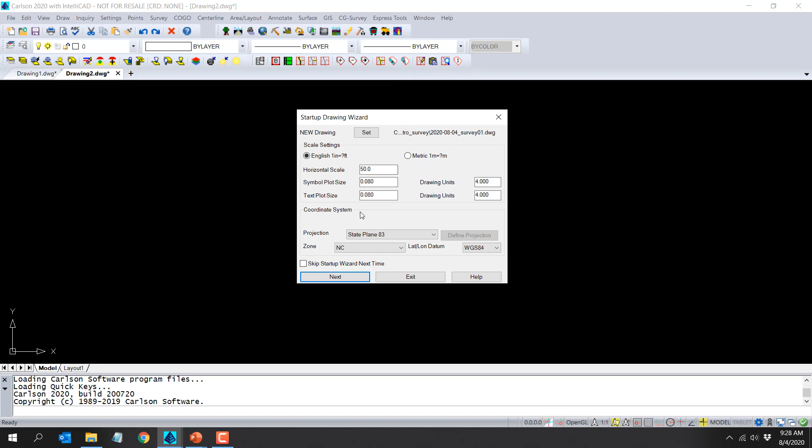So right when starting the drawing, I'm going to set the projection and zone so that everything is geo-referenced. You can see here on this wizard, the first screen, I can set a horizontal scale and some annotation.

I'll pick next, and here I'm going to tell it that I want to import a text file into a brand new CRD file. Because I'm using the drawing folder method, it knows that the data path, or the folder it's going to save in, is wherever my drawing is. And then it's got my CRD file name.

So the wizard just puts me right into my next step, which is importing my text file. It's looking in the same folder where my drawing is, and I had a text file. I can select it, and then I get data preview here. So it shows me the first 100 lines. Hopefully I can tell if I'm in the right file or not.

Back here, I can specify the format, comma delimited, space delimited, what have you. Another preview, and then when I draw points, I'm going to choose to use the Draw Locate Points command, which is one of the commands that's in the Points menu, so everybody has it. We'll pick OK.

And then the Draw Locate Points dialog box, it is pretty generic. It lets me set one symbol, one layer, kind of the same settings for everything is how I'm going to use it. So I'm going to use this command and draw all the points into the drawing. And so here they are.

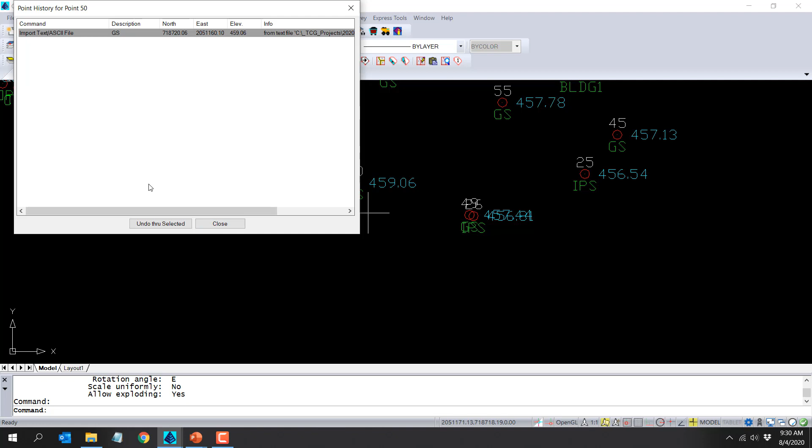I also have options to undo some or multiple commands. I can change the symbol or see it if I have any GIS data associated with it or an image. So if this is a field located shot and a picture was snapped, I can attach that or see it.

Some of the basic point management commands, if I want to list points, I can do so here. This is Carlson's kind of a text editor, it's like a notepad. So you can see all of the points. You can save it, you can print it to the screen, whatever.

Or if I actually need to edit points, I can pull up this dialog box, and you're actually working in the CRD file. You can double click, you can edit anything. There's also a find and replace function. I'm just going to close without making any changes.

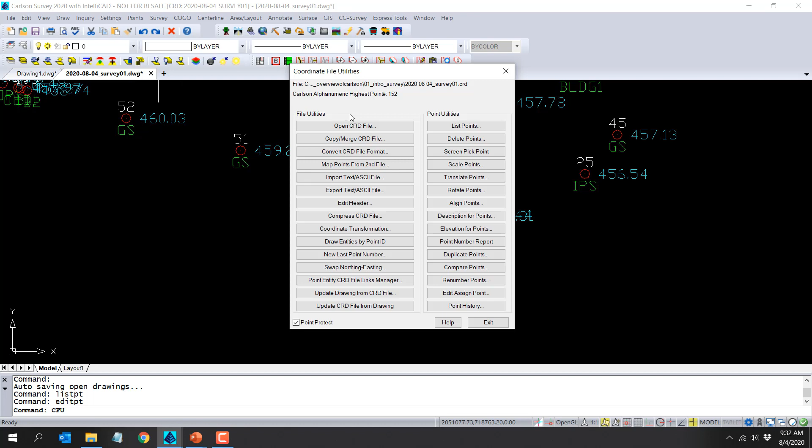So again, under the points menu, you can pretty much do anything you want. There's a ton of utilities and different things that let you edit the file or edit the points on the screen. Coordinate file utilities is kind of a good little catalog to go in here if you're not sure where to find something. So the left-hand column deals mostly with the file, the CRD file edits, and then the right side is more for on-screen.

So I want to show you one other property of points, and one of the best ways to do that is to use this command called shrink wrap entities. This is a command whose primary reason for being is to help you create a boundary around points or lines for a surface.

So when I go in here, it's going to create a 2D polyline on that layer around whatever I select. And so you can see I'm not being very specific, I've just put a window around everything. And you can see that shrink wrap polyline catches everything.

So this is with no preparation work. It's not looking at any points to figure out what's good for a surface or anything. This is the shrink wrap that we get. I'm going to erase everything, and then use Carlson's Field to Finish feature to redraw everything back in.

Field to Finish is specific to survey, but it's also in construction. It's in takeoff.

When we drew points with draw locate, it treated every point, regardless of its description, exactly the same. Same symbol, same layer, same everything.

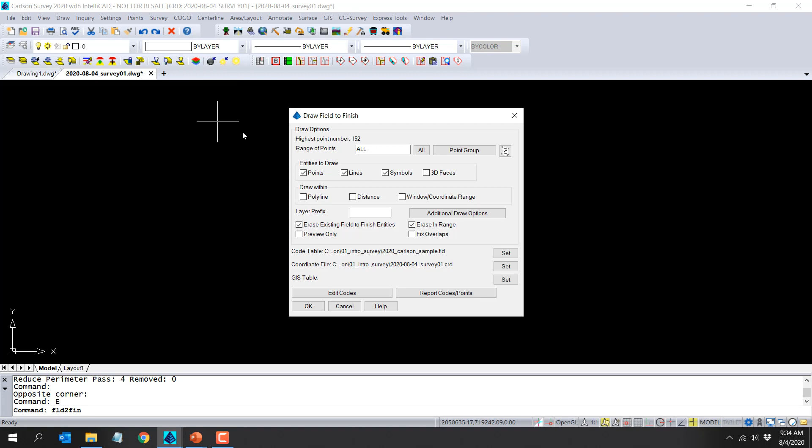All right, so let's just make sure I've got the right file set. I didn't think so. Let's see, existing. So this is my FL. Oh, nope, there we go. All right, so this is my FLD file.

I'm just going to draw everything to begin with here so that you can see what we've ended up with. So when I zoom in, you can see that the points, most of them look different. You can see I've got symbols here for my trees. I have line work that's been drawn. At the corners, I have different symbols again.

Let's just look at this in 3D. And you can see that I have line work and points that are elevated. So again, this is kind of a step that I want to take before I build a surface. I want to look at everything in 3D to make sure my elevations are good.

Now, what this 3D viewer allows me to do is ignore zero elevations, so that's how it was set. Now I've unchecked ignore zero elevations. When I zoom out, I can see everything with zero elevations down here, and then everything that's elevated up here. When I build my surface, I'm going to be able to just put a check mark and ignore all the zero elevations. So my main thing I want to look at here is that I don't have any really skewed elevations, and I don't.

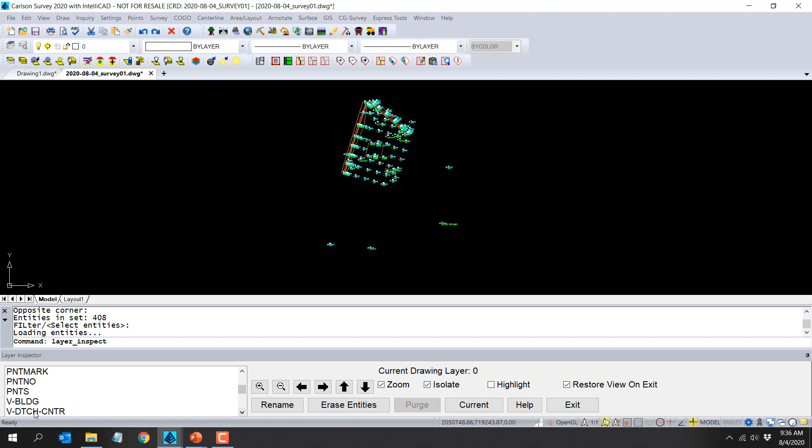I can also look at this with the layer inspector, and let's see what field to finish has drawn for me here. I'll scroll down a little bit. So layer inspector is isolating and zooming to whichever layer or layers I have selected in this list.

And then here on this layer, these are all my 3D polylines. So these are break lines for my surface that I'm getting ready to create.

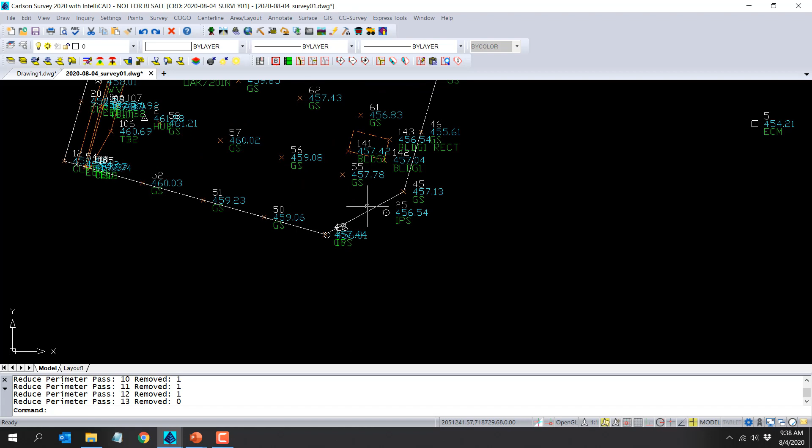And then finally, let's look at that last piece of the puzzle that I mentioned earlier. Let's draw shrink wrap, and I want you to see the difference in how the shrink wrap polyline looks now after drawing everything with field to finish versus before. So here's my 3D polyline, my 2D polyline, which is my shrink wrap.

Notice that this time, for some reason, it's ignored all of this. And right here is the best example and place to demonstrate what's happened. So if I pull these out, you can see the shrink wrap actually has included my ground shot, but it's skirted just around my iron pin. It's avoided my iron pin here.

So these are property corners that I know typically anything with that description is going to be a property corner, and the elevation is not going to be good for my surface model. I don't want it included when I build a surface.

Same thing here. So one thing that's built into the shrink wrap polyline command, it ignores anything that's considered a non-surface point. Okay, great. So why are these non-surface all of a sudden? Well, I did that with field to finish, but if I double click on this point, you can see here it's been tagged as non-surface, and I did that through field to finish.

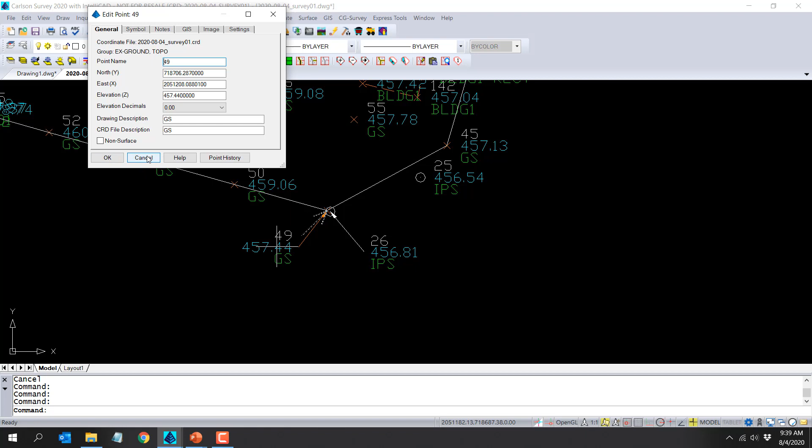So a ground shot is not tagged as non-surface, so it will be used for my surface. This out here is a non-surface. There are going to be other things, like interior points such as this hub, that are non-surface.

Under the surface menu, triangulation, setup, utilities, non-surface points and entities, report non-surface points - I can see a list here of all the points being ignored by the surface or by the shrink wrap. When I build a surface, these will all be ignored. Let's go into field to finish.

I'm going to edit those codes so you can see how that comes into play. ECM, right here, I've got that check mark. Anything with an ECM description is going to be tagged as non-surface. It'll be ignored by my shrink wrap and by my surface model or anything else that uses it.

While we're here, let's look at our center line of ditch. Here's a good example. Center line of ditch shots are always drawn with points, but in addition, 2D and 3D polylines. This is the layer for the 2D polyline, this is the layer for the point, and here are my 3D polylines, which will have just a generic symbol.

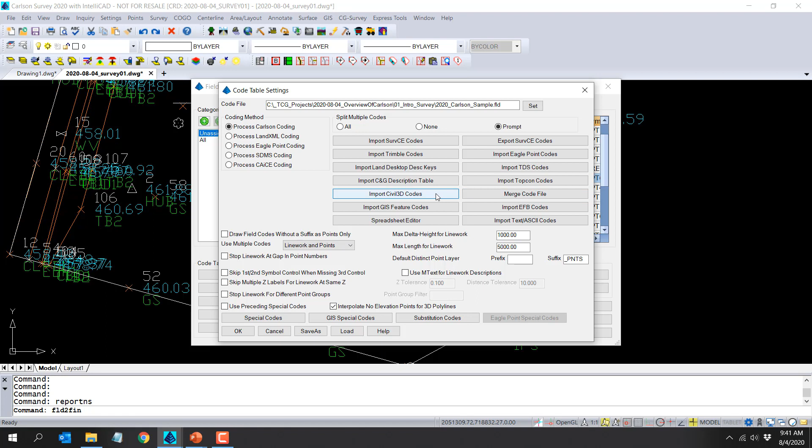Not there though - Civil 3D codes. I think description keys are in here. Land Desktop keys - there you go.

Okay, so this has all been drawn. I'm actually going to erase this shrink wrap. I always recommend before you build a surface, draw your shrink wrap, see what it looks like, and then you can erase it. Also look at everything in 3D, make sure your elevations are good, and they are.

When we're ready to build a surface, I'm going to go to Triangulate and Contour. And if you look right here, shrink wrap is actually built into this command. So the reason you do it ahead of time is to make sure that boundary is what you expect, and then you can erase it knowing that when you come in here, you'll get the same result.

Okay, so let's start at the top on the Triangulate tab. We're going to write a triangulation file. Yep, that's the right place. And we're going to just call this EG.

Let me put today's date on it, and we'll just call it EG. Right here, I have told it to ignore anything with a 0 elevation. So that means I'll be able to put a window around everything here, and it will only pick things with good elevations.

I'm going to uncheck these - we'll check them back later - but these are adjustments if you're building a surface from contours in the drawing, which we're not. We will draw new contours here, so 1 foot contours and 5 foot contours. We're going to label those, and then on my selection tab, I am going to choose all points and all polylines.

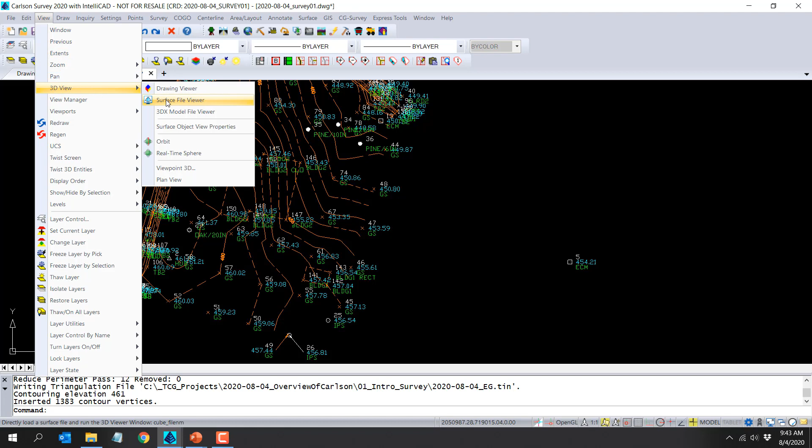Window around everything, hit my enter key, and when I zoom in, you can see that the surface has created contours. It's built the surface and drawn the contours for me. If we go to our 3D viewer window, now we can look at the surface file viewer, which lets me select the TIN file, and this is what the surface looks like.

Over here, I can turn on and off the shading, okay, but I can spin it around. I can see my work that I did ahead made sure there was no bad elevation, so my surface is good.

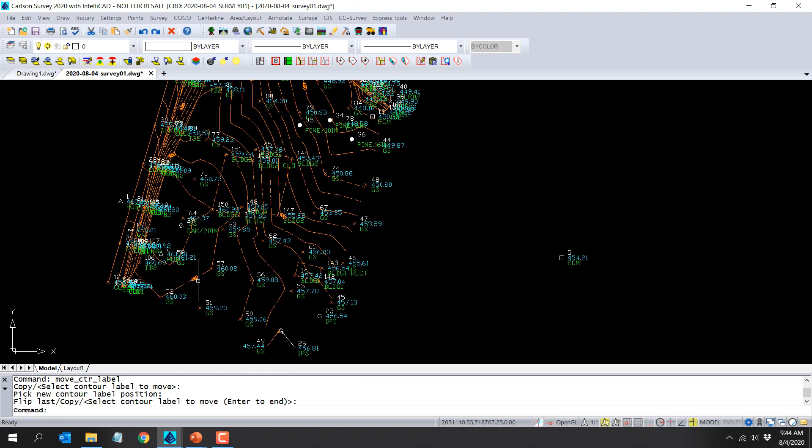And let me double check here - I think that's all I wanted to do in here with our surface. So now I want to bring in a background image. Okay, so I have some options.

If I just want to bring in an image and I'm okay with positioning, rotating, and scaling it myself, I can do that without a problem. It's in the Draw menu under Image. This is just the way you insert an image in plain CAD, in the first 7 menus that everybody has.

However, Carlson's GIS program has some really easy, handy tools to bring in geo-referenced images. We're currently in Carlson Survey, which has a GIS menu with limited functionality. You can bring in a few kinds of images, like MrSid images, or place an image by a world file. You can also do things like importing a shapefile.

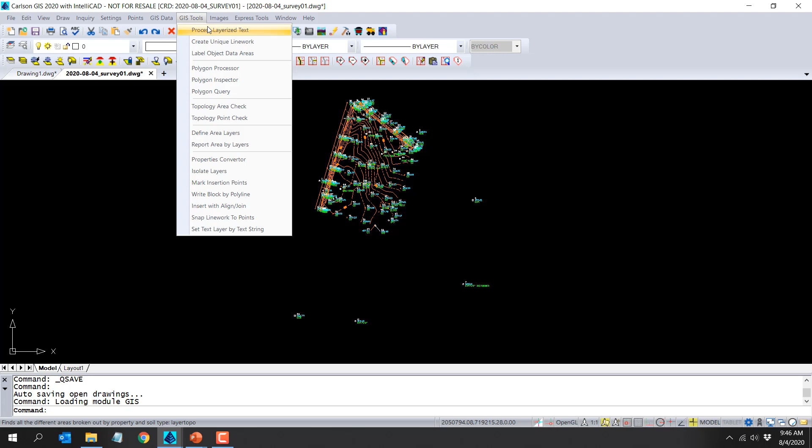What I'm talking about now would actually be another module, a different program called Carlson GIS. I've just loaded the GIS menu, and after the first 7 menus you can see GIS data menu, GIS tools, and the all-important Images menu, which is where all the cool stuff is kept. From Images, you can convert a MrSid or place by world file.

But we can also place a Google Earth image. I'll name this Google Earth, and screen pick my window. I barely made it, didn't I? And there we go, you can see the Google Earth image. Usually this is going to be the newest imagery you can get.

Another place where you can bring in other imagery is under GIS data, Esri ArcGIS services. This can be a little sporadic as far as what you get from linking up to the Esri servers, but if you want a quad map, you can do that, or bring in images of soils maps and things like that. We'll call this Esri, and this one takes a little bit longer.

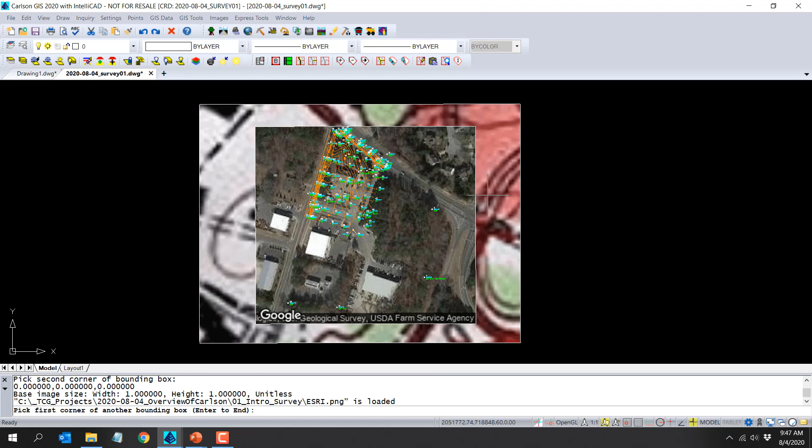And it'll come. There we go. Oh well, let's move this to the back. There we go, so this is like a quad map. Let me freeze those here for the moment.

Also, if you place a Web Map Service image, this is Carlson's version of the same thing for Esri that we just looked at, you're just using images on Carlson's server, and they've given you a lot of the same things. You can also use this to attach to your local municipality's database if they have available imagery. Similarly, Web Feature Service lets you attach to a municipality server to get all that data, if available.

Back in the file menu, let's look at exporting to Google Earth, which I mentioned earlier. If you're in a design role and want to send a subdivision layout or similar to your client, you can select anything in your drawing and export it out to Google Earth. All this requires is that you be in real-world coordinates, and, like we did at the very beginning, that we set the zone and projection for a project area.

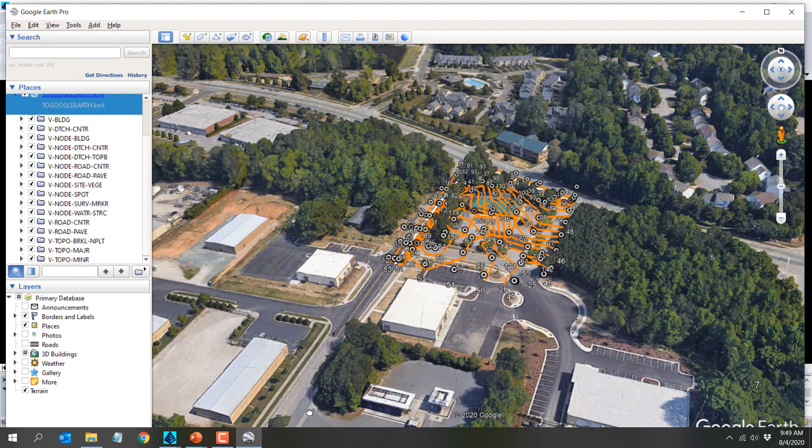You can see over here you've got all your layer information, and we can zoom in, but this is a good way to work. All this is a file, a KML or KMZ file. There it is, so you email that to your client. They double click on it, and if they have Google Earth installed, they're going to get this exact same view. So it's very handy as a design tool.

Okay, so let's move on. I think I'm actually going to close out of this, and I'm going to restart Carlson because I got a video display error. I've been having all kinds of technical problems lately, so I'm going to hedge my bets and just get out and get back in. Okay, so there's my menu. I'm going to switch back to survey and start a new drawing.

I just want to show you how to enter deed information or information from a plat. So I'll go into this folder and set a new file. We'll just call this deed.

Scale's fine, projection, this is going to be assumed coordinates, so I'm just going to hit exit here. So I'm just working in the drawing.

I want to create a very simple little example for you. I want to be sure that you understand that if you're going from a deed and you just have a bunch of boundary calls, or from a plat or whatever, there are many different commands throughout the program that let you do that. If all you want is a polyline in the end, whether you want to do it by northings and eastings, bearings, azimuths, turned angles, or deflection angles, however you want to do it, there are multiple ways.

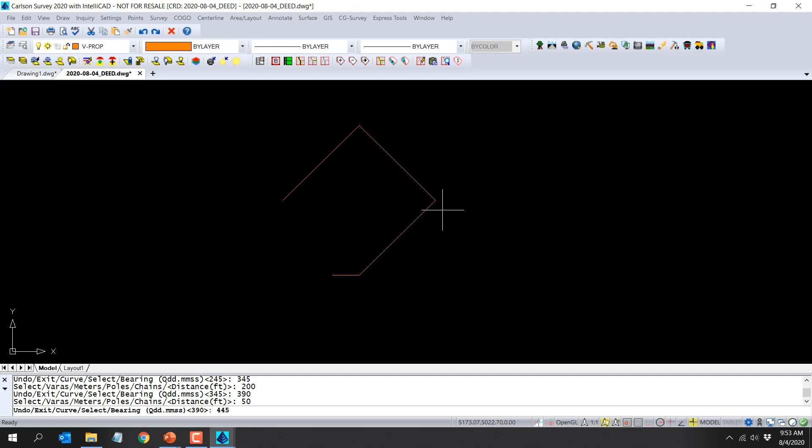And then this may mess you up. I'm going to go actually due west, so that'll be a southwest 90-degree bearing for 50 feet, and then northwest 45 degrees for 200. So kind of the example I'm using here is there should have been a flat spot up here, and we accidentally on purpose forgot it.

So the thing with doing this as a deed description is that it's much easier—if you've already hit enter and realize a mistake, just keep going. It's easier to go back at the very end and fix everything. It's much easier to do that than to try to undo or stop in the middle. So I'd encourage you just to go on.

I'm finished here, so I'm going to hit E for exit, and I have a beautiful, fantastic 1 in 17 closure.

But now I can go in here to process deed file, select my file, and now I can edit that. And this is what I like—again, picture having a list of 100 different calls. In the table up top, I can select one of the legs and it highlights it in the drawing view below. So as I go down, if I had a mistake in any of these lines, I would know which one to fix. In this case, I accidentally left one out.

So I can add it, give it the length, and then set my bearing and angle, and you can see that new line. Now it's here because it's at the bottom of this list. What I want to do is move it up until it gets into position. So it's moving up this list, and that's where I want it. Okay.

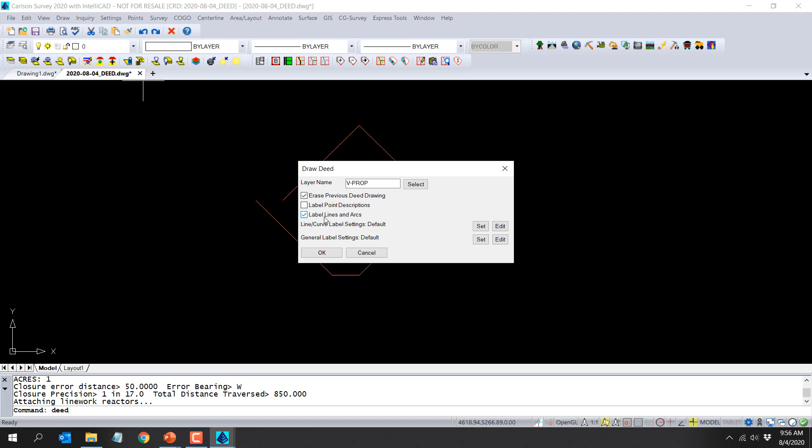I want to redraw this, so I've got the wrong one in the drawing, so I want to redraw. It's going to erase the previous one. Label lines and arcs—so from here, it's just going to put in kind of a generic labeling that we can see here in what's called the Annotate command.

So right now, Annotate has one labeling format for lines, and you can see it here—it's going to be angle above and distance below the line. For arcs, if I had any, it would just label it the same way for everything. So that's good as a generic starting place.

And then I can save and exit out of here and see what I've got. So I've got all this labeled.

Let's look at Annotate again. Under Annotate, it's the same command, but maybe I wanted angle and distance both above the line. So up here, angle, distance, I'm going to set distance above. And if I want them side by side, that's fine, or if I want my distance to be above. So I can set this however I want. And I've only got one polyline, but I could put a window around the whole subdivision if I want, and it would label everything.

Let me go back in there because this is also a good way to go ahead and specify line tables. Carlson gives you options for using line tables and curve tables. You can set it here to never, always, or by scalar. If you do it by scalar, you can set a distance here in plotted inches. So anything shorter than an inch would go to a table, anything longer than an inch would be labeled on screen. And you can see the same thing here.

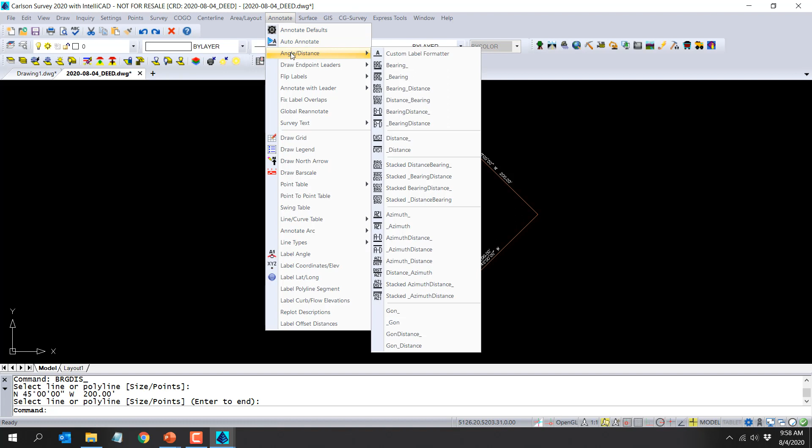All right, so Annotate's good to put labels on everything in one fell swoop, but maybe your outside boundary lines, like your outer boundary, you want to label differently. If you want to just do a few lines here and there that look different, you can do bearing and distance. Notice when we did Annotate and selected this, it did all the legs of the polyline the same. But if you just go in here and specify one angle and distance label format, it's just going to do the one segment that you select.

We've also got annotation here where you can move a label with a leader. So maybe it's just a little bit too short, but you don't want to put it on a curve table, or maybe it's the only one. You can do something like that. So with their annotation, Carlson gives all kinds of options. Again, there's so much more in here that I'm able to get to, but hopefully that gives you a taste of it.

Okay, close that. Let's open up and look at, oh, I was in the right place. So I want to show you Carlson's LotNet routine. This is Lot Network, a way to subdivide a large area using a certain set of criteria. Carlson's LotNet is available in Survey or Civil, and I think the other maybe Takeoff. You can work with LotNet in a couple of different ways. You always have to have the outer boundary, but as far as the roads that are internal, you can have the roads drawn in two different ways. You can see here I've got a center line, and then I've already done my offsets to create the right-of-way. So that's something I did ahead of time, and I can start from here.

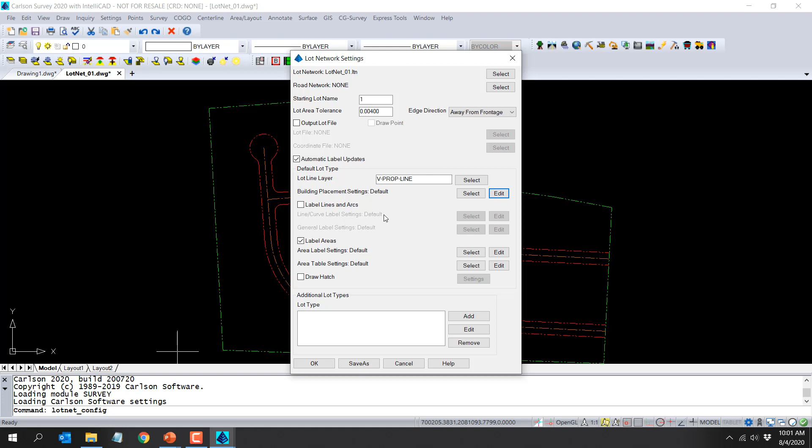Label lines and arcs, I'm going to have that turned off for now, but all it does is use auto annotate that we just saw. And then I'll have it label areas for me.

On the toolbar, the next thing is to set the boundary, so I'm going to select that closed outside boundary. If I had a road network, I could change it here, but I'm not going to use that. I'll add my right-of-way polyline, so if I'm not doing it as a road network, I have to be able to select on my right-of-way polylines. Okay, so now it has its enclosed areas to subdivide.

So I'll start over here, subdivide area, and I want to set this up. I'll pick inside lot area to subdivide, so I'll select here. My first thing here, it's kind of like I talked about with auto annotate. I want to put in my lot settings to do a whole bunch at one time, see how they work, try to get that consistency for as many as possible, and then there's going to be a few that don't work, and I'll go back and tweak those as I go.

As a starting point, I'm going to have it draw 15,000 foot lots. Minimum frontage is 100 feet to be measured at the setback. I can set my minimum, maximum depths. Remainder is going to apply equally to all lots, so everything should be a minimum of 15,000 feet. And then when I check that building placement, I can just recheck all my setbacks here.

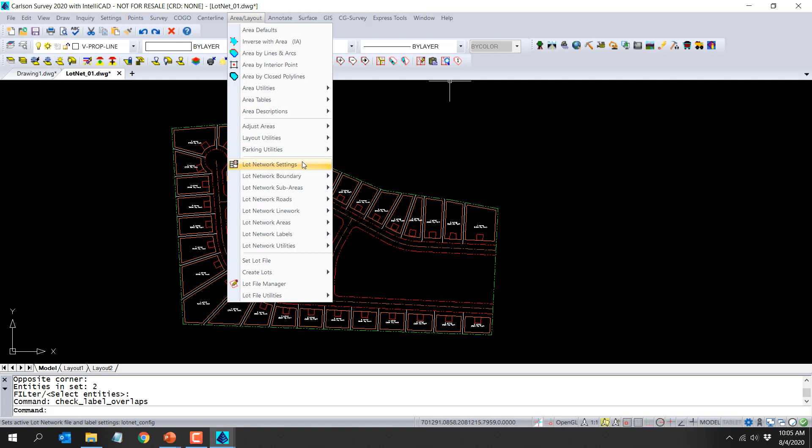So again, there's a whole lot more that you can do. You can report, you can number, renumber, put everything to a table, export it however you want. Let's take a quick look under area layout, and you can see under lot network all the different things that you can do. You can define sub-areas, so if you have areas of poor soils or open space that can't be included in your lots, you can tag those and separate them out and report them differently. So there's a ton of things that you can do. I just don't have time for on this, but that is Carlson's LotNet.

So next I want to show some grading tools. So this is what I call my little sandbox, a demonstration drawing to show you a bunch of different commands that are available in Carlson, because when you get to site grading, there's so many different things you do in so many different orders.

I have other webinars that go through these, like go through a whole site project grading. But I think for today, I just want you to see the tools, and then you can kind of be creative, and I think a lot of people will understand how those can be used.

So these are going to be tools in Carlson Civil. I'll pull that menu back up here, and switch to Carlson Civil. These commands are going to be under 3D data, mostly under 2D to 3D Polyline.

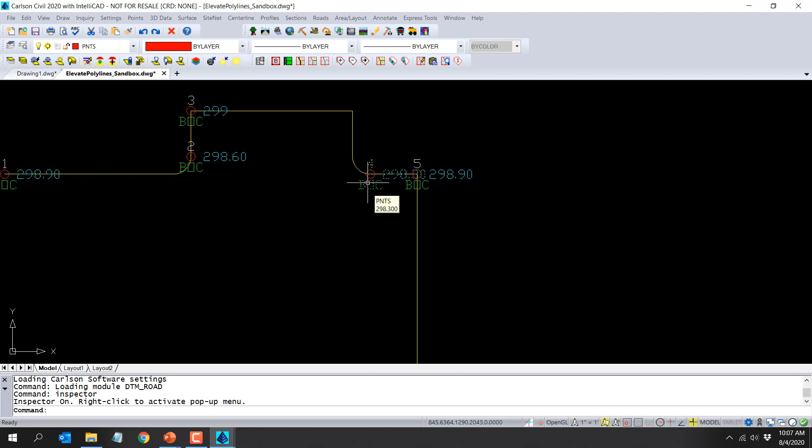So let's zoom in here and just look at this example. I'm going to turn on Drawing Inspector, and you can see that I have a 2D zero elevation polyline here on E road back of curb. These points are set on vertices of that polyline, and this is just a 2D polyline. It's just got an arc in here.

What I want to do is elevate and create a new polyline using these elevations. So I'll use 2D to 3D polyline by points, and ask for CRD file, that's fine.

I want to keep my existing polylines and put the new polyline on this layer. Watching the command line, select polylines to convert, enter, and then select the points. I'll just put a window around it, and you can see it's changed.

If I look at that polyline in 3D, you can see it here. I'll zoom out. So here's the 2D zero elevation polyline, and here's my 3D one that's been elevated now.

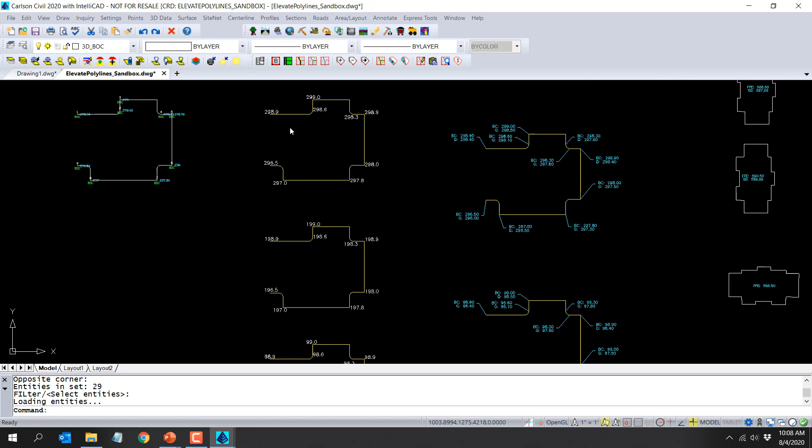I'll show you this. The primary purpose for this one is just to see that we have 3 different polylines with text. I don't like this method. The main reason is that it's hard to understand how close the text has to be to what part of the polyline for it to elevate. Is it going to be this vertex? Is it going to be the closest part? Who knows? So I wouldn't recommend this, but I am going to do it just so you can see.

I've got 3 different polylines. I've used one of the Carlson tools to change the elevations by 100 on each. Anything I'm showing you here can be done on an entire Target parking lot, if you're trying to elevate islands or something.

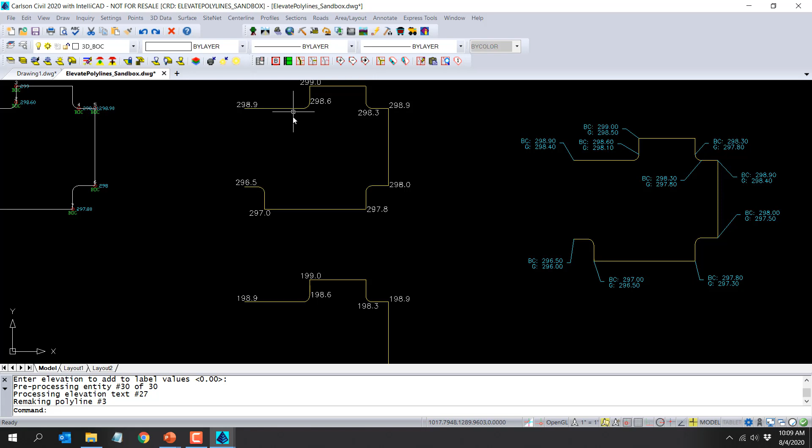So this is 2D to 3D polyline by text. Watching the command line, select a sample of the text, sample of the line or polyline to convert, and then I'm just going to window everything here. And it elevated the actual ones - it didn't create a copy for me, but you can see that did work.

So if you're going to do this, I recommend this option, by text with a leader. I like this one because just like with points, you know exactly what location on that polyline is getting elevated. The other advantage of doing points or this with a leader is there doesn't have to be a predefined vertex for it to know what it's elevating.

So I can just - there's not a vertex there, I just snap to it. And let's make this a foot higher even. Then the other intricate part of this is that we have two elevations pointing to the same location on the polyline, and how does the software know what to use?

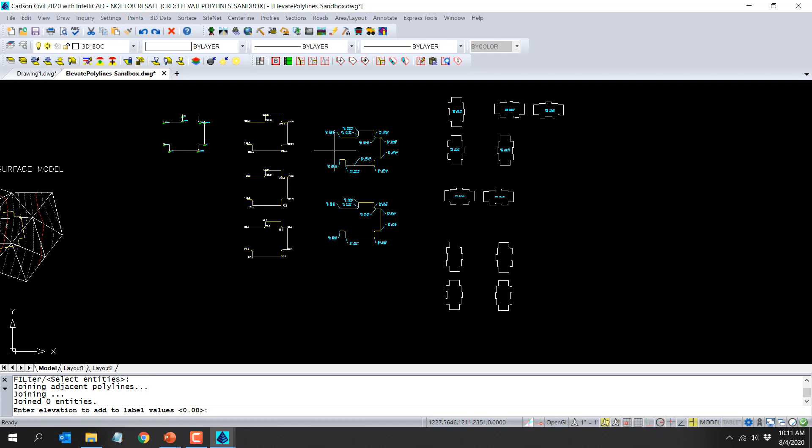So let me show you how that works by text with a leader. Select a sample of the elevation text, sample of the leader, sample of the polyline to convert. I'll put a window around both of these, and then it comes up and recognizes there were different prefixes and asks me which one to use.

I'm going to use the back of curb elevation, and so it has done so. If I click here, you can see it's inserted that vertex, high point. It's elevated all this for me. If I look at everything in 3D...

Oh, I had a 0 elevation. Oops. Oh, did it not do one? Oh, they're just different elevations, that's why. Okay, bad example, but you could see everything was elevated. I confused myself there for a second. So these two polylines have different elevations - this one's at the 90 level, and this one is up in the 200s.

Okay, so building pads. Let's say you have a whole subdivision. You've got 0 elevation building pads, and you have labels showing finished floor and subgrade.

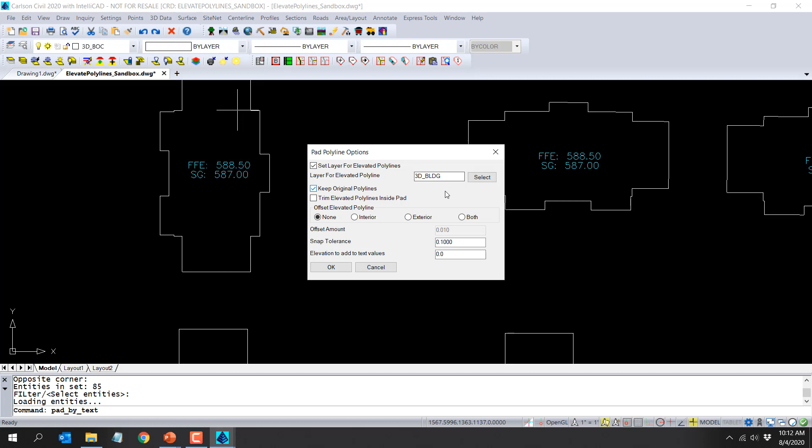Under 3D data, this one's here, pad polyline by interior text. I'm going to have it put the 3D polyline on its own layer. So it asks me to select a sample of the elevation text of the boundary line work. Select all.

Again, it found 2 pieces of text with different prefixes. And here it's created that 3D building for me.

And then in Civil, you also can go the other way, so you can see how I cheated here. These are elevated buildings, and under Annotate, label Polyline - is that it? Yeah, no, that's not it. Ah, I just got lost.

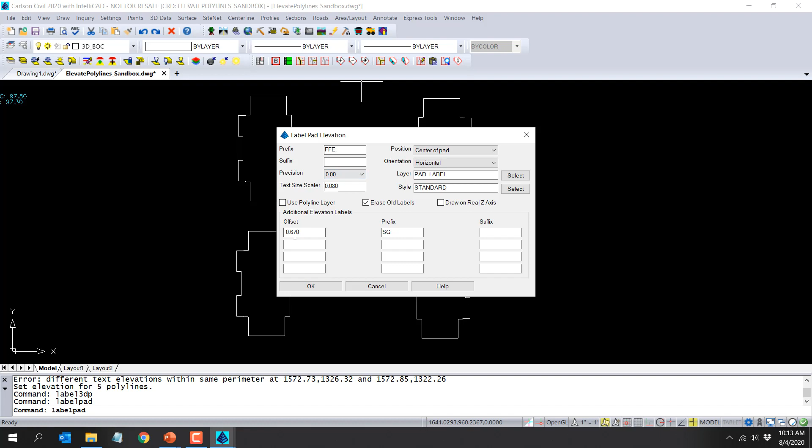Label polylines, there we go. Label pad elevations, so you can see it's still set up. I've got a FFE, and then subtracting 8 inches to label my subgrade, and I can do that.

Let's go up here. I want to focus now on this one. So here's another building pad with a 0 elevation, back of curb with a 0 elevation. I'm going to use a different command for no other purpose, just to show you something different. If you have just one polyline, you can also do this by selecting the text. So I'm going to select that text and then select the building pad, and it's just maybe a little different, but get the same result.

Now I want to elevate this curb, but you can see it's got 0 elevation. I want to show you one of the other tools in here to set points on this curb so that eventually we can do something like this. So 3D data, 3D points, points by slope.

I want to enter my slope as a percentage, and I'm going to screen pick my location. So my reference point, I'm just going to snap nearest to this elevated pad. You can see it reads the elevation. And then my new point is going to go here.

The slope is going to be -2%. And the description is going to be BC for back of curb. So you can see the elevation it used.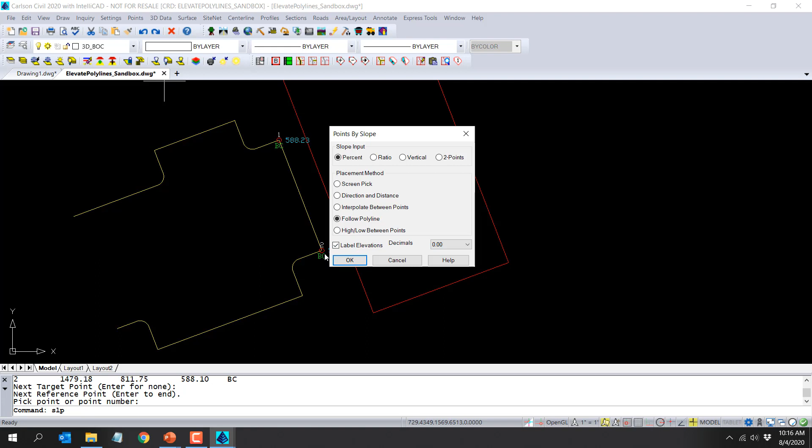Let's say I want to come from point 2 and I want to set a point here, I could do a screen pick and it's going to calculate the slope straight line distance from here to here. Or I've got an option to follow the polyline, so it'll calculate the slope along a longer length to give me a different elevation. My reference point in this case would be point 2, and my target point would be here. We'll go up at a +2, follow that polyline, and that's the elevation I get.

So I can use this as a tool for setting these points, and then go back 2D to 3D polyline by points and start elevating my 2D polylines to 3D for grading.

Okay, so I think I'm done with grading here. I want to move on next. I'm going to show you how to do just kind of generic center lines and profiles, just manually. Let's say you've got a single center line of a road or whatever. And then we're going to move into RoadNet, and I'll do a little bit of hydrology.

We started this off setting up our project and data folders using that drawing folder method. Again, drawing folder is a good option for you if the project you're working on doesn't have too many files. As soon as we start introducing center lines and profiles, or roads particularly, we're going to get a lot of files.

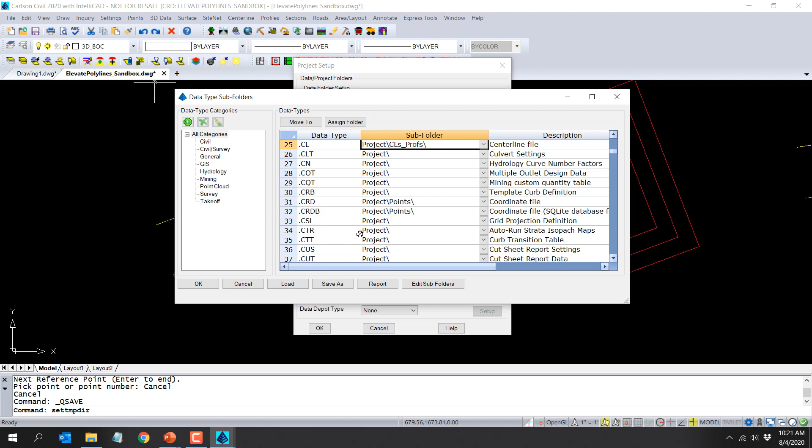So you can create this project folder and subfolder tree. The second step is to go to the data type subfolders. This lists every single file that Carlson creates, but you don't need to worry about all of them, just the files you know you have a place for. So CL files are for centerlines, and I want those saved here. CRD files here, drawing files here. Any other random file that gets created goes to the top level project folder, and you can double click and browse to where you want to save it.

So now that we're moving into centerlines and profiles, I'm switching to the project folder. I'll pick OK, save this, and then open my next file.

All right, so here you can see I've got contours. If I do a 3D view, I actually have a TIN file already, so I've got a surface underneath. I want to show you how to manually create centerline files and profile files.

This is in Survey or Civil. I'm purposely going to stay in Survey because I'm very much a fan of the fact that Carlson gives you the ability to do profiles from survey. It's just a small set of menus, commands here under the Surface menu. But everything I'm getting ready to show you, we're going to stay in Survey to do it.

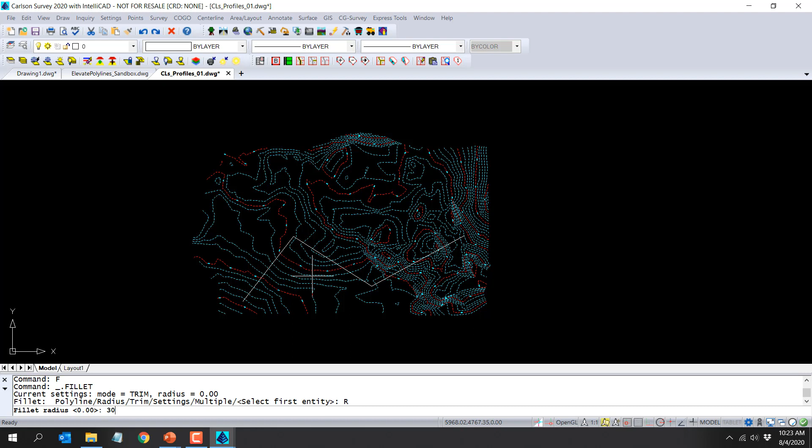I'm going to start off by sketching in a few tangent polylines. I'm going to fillet it with a 300-foot radius. And then I want to define this as a centerline file. We call it a centerline file because it's any horizontal alignment, so it can be used for anything, not just centerlines.

The command is under Centerline, Input Edit, Centerline File. This is like a lot of Carlson's... oh, I went to the wrong place, anyway. Scratch that, I'll explain that in a minute. I'm actually going to do Polyline to Centerline File, since I have the geometry in the drawing as a polyline.

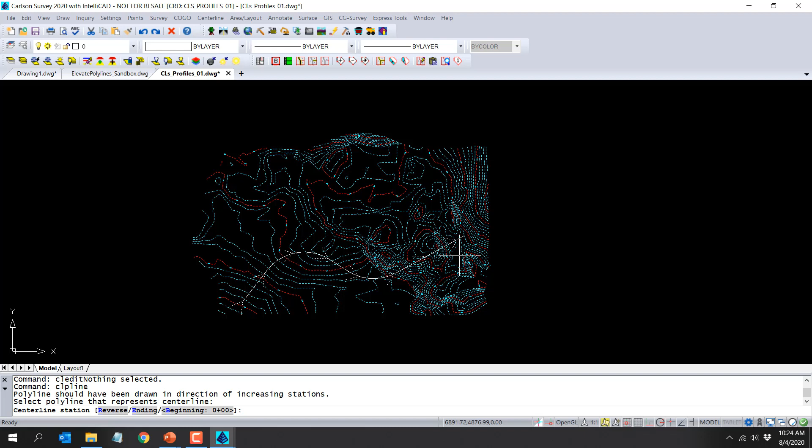So right here, I'm just going to give it a name, CL1. Then at the command line, it prompts me to select the polyline representing the centerline. It gives me little arrows showing the direction, so I have a chance here to reverse it if I want. I can also change the default starting station of 0, but I'm going to leave it for the moment.

So that CL file's been written, and I'm going to go to Centerline, let's just station it real quick. So you can see my stationing, I can set that up here, and change the formatting of the label, whatever.

Now I don't have to create a CL file in order to get stationing, but if I have created a CL file, I would mostly recommend that you do that, always use it, just to keep things consistent throughout. So there's the CL file, and here's my stationing.

Now let's talk about Input Edit. You're going to see this across a lot of other Carlson commands, this Input Edit this or that. This is Carlson's file dialog box. If you're going to create a new one, you can do that from here. So if you're trying to recreate a design that's already been done, you've got the paper plans, you just need to build the CL file, you can do that starting here with a new file. Or if you have an existing one you want to edit, you can do that too.

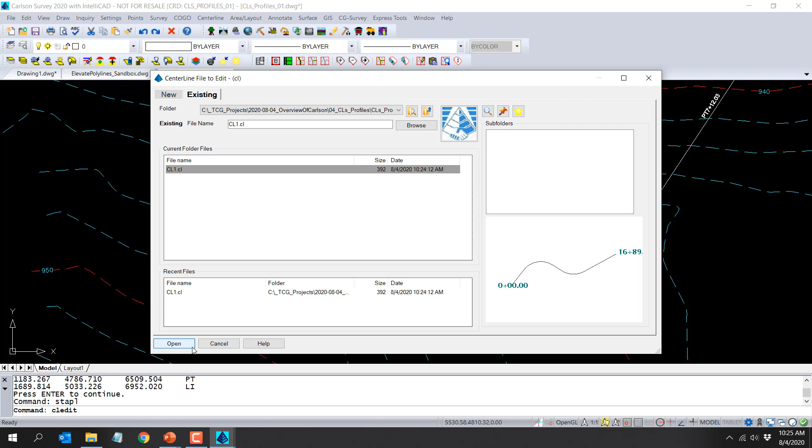So here, like in most things, you've got a graphic view and a table view. If I want to change any of those components, I can do so, or I can go here and make a change to the station, for instance. You can see my station has updated. I'm just going to save and exit, and you can see that my stationing has updated in the drawing. So, very simple, not much to it.

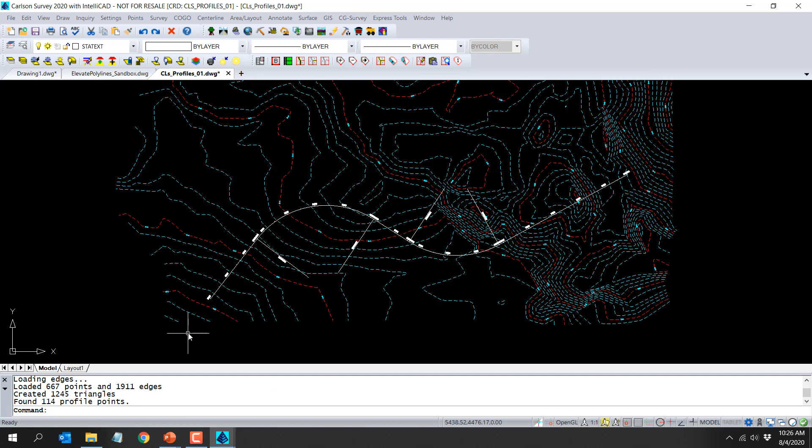But let's move on and look at how to manually create our profiles. In Survey, under the Surface menu, I can create a profile from a grid or triangulation surface, which is exactly what I have - this is the surface I want to sample. Pick OK, and then the profile to write - this is my Centerline 1, and it's going to be my existing ground. At the command line, it gives me an option of choosing that polyline in the drawing, but anytime I've created a CL file, I want to refer back to that.

So it has created the profile. If we go to Surface, we've got Input, Edit, Profile File. Just like we talked about a minute ago, I want to look at this profile, and here's my profile editor. Same thing, I've got the graphic view up top. As my mouse moves along, you can see the information is updated. I have a table view here of each of the PVIs.

But very important and very cool - it's one of my favorite commands in here because it's so simple, but it lets you do so much. Carlson has different profile types - there are 6 types of profile. This is a profile that was generated from my surface and an alignment, so really the only information it has is the station number along it, and then an elevation and slope.

If you have different profile types, you get different headings at the top. You always have the original station, elevation, slope, but for instance, when we switch and say this is a road profile, which doesn't fit, but you can see you get vertical curve and sight distance. When you have a sewer type, you can see you've got pipe size, rim elevation, manhole ID, and so on. We're going to come back to that, and that's going to be real important to us.

But for now, we're just going to save this as an existing ground profile, exactly as it was sampled. And I am going to add a proposed ground profile over top of that. So this will be going into the same place, just telling it I want a new profile called CL1PG.

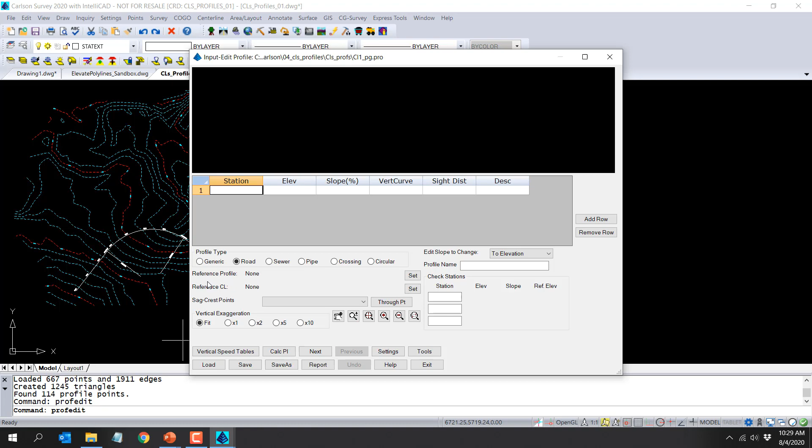But the reference profile is going to be my existing ground, so while I can see it and reference it, it's not active - I can't move my cursor or anything. But here I can see my beginning and ending stations. As I design this new proposed ground profile, I'd like to tie in at the start and at the end to existing ground. So this is my first station, I can type in 1,000 for my starting station, and it's going to tell me what the reference elevation is.

Well, this is cool how this works. If I know I want to start my proposed profile here, I'll set my station, and then I can type in that reference elevation. Notice when I type it in, it tells me over here what the depth is - so just keep that in mind. If I want to tie in at exactly my existing or reference elevation, I can just type a 0 here and set the depth to 0, and it reads that exactly.

So let's go to the end and just put those in first, 2689.8102. I can see it, so in a way I don't actually need to do this - I can just go up here and enter my station number. If I can do it correctly. And now I know I can just go right here and set the depth to 0, and I have kind of a generic proposed ground profile from start to finish.

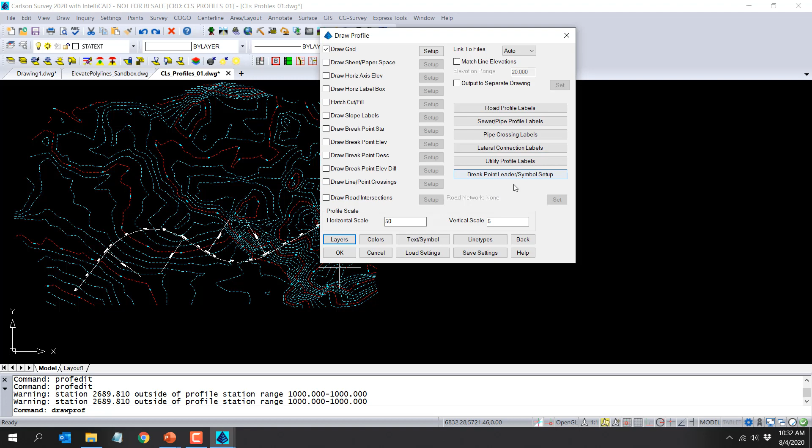But this is the important thing. Notice all these label buttons over here. These are based on the type of profile. So if we have a road profile, I can go in here and tell it how the labels for a road type profile should look. And I'm just going to accept what's there. You'll have to trust me that you can do pretty much anything you want.

Let's pick OK. So my elevation range, the lowest is 924.7. This is showing an elevation of 920 for my bottom grid. I'm going to change that to 910 to make sure I've got room to get some pipes in there. And we got it.

So here it's nothing fancy. I may need to change it, but you can get the gist of it.

So on top of this, I want to add like a storm run of pipe, and some crossing structures. So I'm going to use Input Edit Profile File again. This will be another new one, and this will be for storm.

My reference profile in this case, I'm going to reference my proposed ground. And again, you may have paper plans you've already got to recreate. I'm just going to kind of swag some stuff in here.

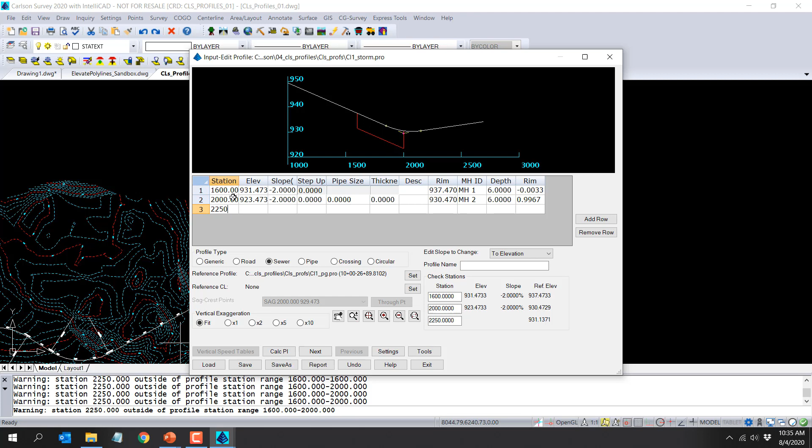And then I'll do my last one at 2250 - 931.14, manhole 3, 6, and there we go. So the only thing I need to add is the pipe size, so let's just call it 18-inch RCP for both.

Very simple. I'm going to save this and exit. And then before I draw it, I'm going to go back in.

I'm just going to repeat this one more time, and I want to show you that you can also add crossing pipes. So this is going to be a crossing type, and loading in, I will do my proposed ground surface, my road again. And I just want to do something that doesn't really conflict with anything, so I'm going to put this in at like 1275. Let's see what my elevation looks like, just to swag that in.

So this, I'm going to set this about 3 feet below. So let's do, I'll do it lower than that, 938.6. And pipe size, we'll just say it's a 6-inch water.

Save it, exit. All right, now let's draw it.

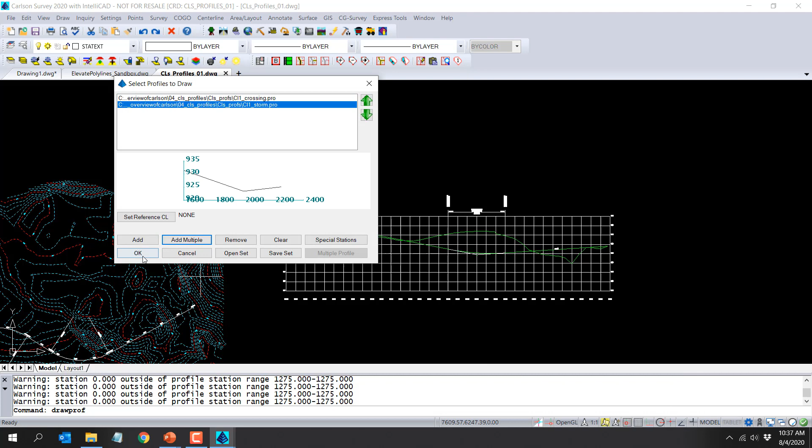So sewer pipes, this is what the labeling looks like. I don't really have much. Draw manhole name, do something like that. Pipe crossings are going to look like this. Oh shoot, let me cancel that.

So the other thing is I want to keep the grid that's in here. So I'm just going to uncheck where it says draw grid, and then you'll see what option that gives me. Now I've got an option to draw an existing grid, only because I unchecked grid in the previous screen, and I can pick anywhere here, and it just adds it. So I don't need to know the scale, I don't need to know anything.

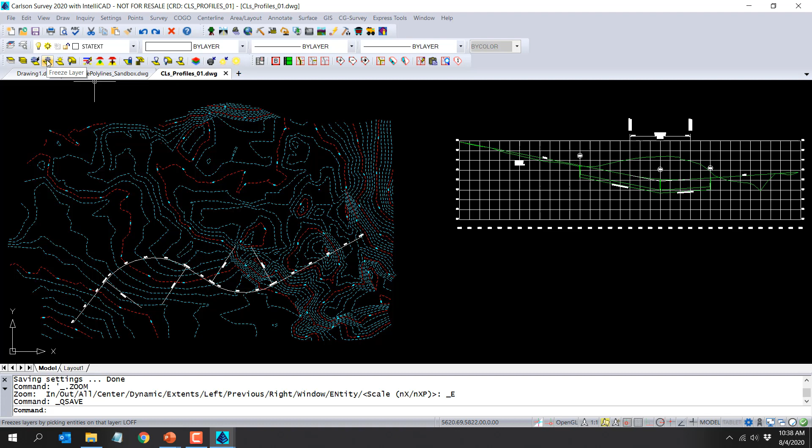I would redo that. So all this was in survey. It can be done in civil. I'm sure it can be done in takeoff as well, but I just like that you can do that in survey. So I'm going to close these previous drawings.

And next, I want to show you all about Carlson's RoadNet. So this is, we're just going to start from a drawing. And this is when you are actually in the design process, and you can use it for a single road, and it would probably be very helpful. But absolutely, if you have intersecting roads, more than one road, this is the way to go.

The only thing you need to start with is an existing ground surface, and you need your center line sketched in, preferably geometrically nice and neat, perpendicular, things like that. All I have here are elevated contours that were, I think, copied in from GIS. So they're not great. If you're doing a real design, you want something more than just contours, but we're going to take what we have here, and we need to build a surface from those contours.

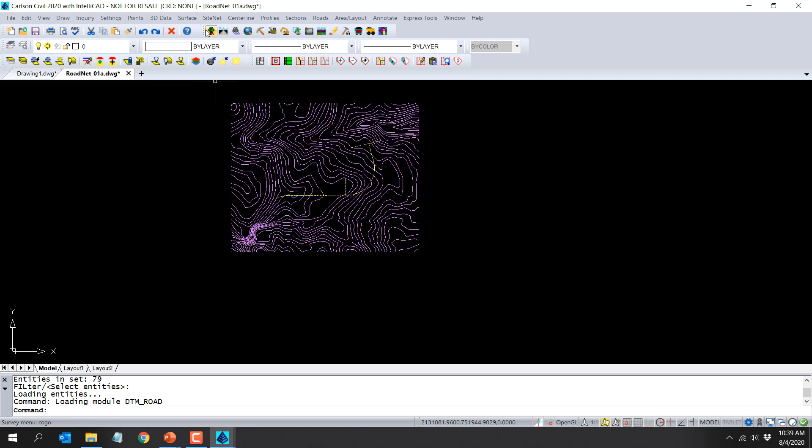So I'm going to switch over to civil because I'm going to need to be there, and go to Triangulate and Contour. And you've seen this. I'm going to have some different options, but my TIN file, and I'm always very specific. I don't really trust, we'll do EG by contours. Surfaces from contours are not optimal, so I always put it right in the file name so I know how much or how little I can trust it.

Also down here, I love that Carlson gives you these options. They understand that creating a surface from contours is not great, so they give you some additional adjustments that keeps high points and low points from being flat and things like that.

I don't need to see contours, I've already got them. So no labels, selection, that's all good. It's going to ignore 0, so I don't have to worry about my center lines being picked up. I do see errors. This is more in the interpolation, and everything is a vertical problem, very little, so I'm not going to worry about those.

I am going to double check here to make sure what my surface looks like in 3D. And I don't see any busted elevations. I don't see anything that caused me grief, so I'll just go with this.

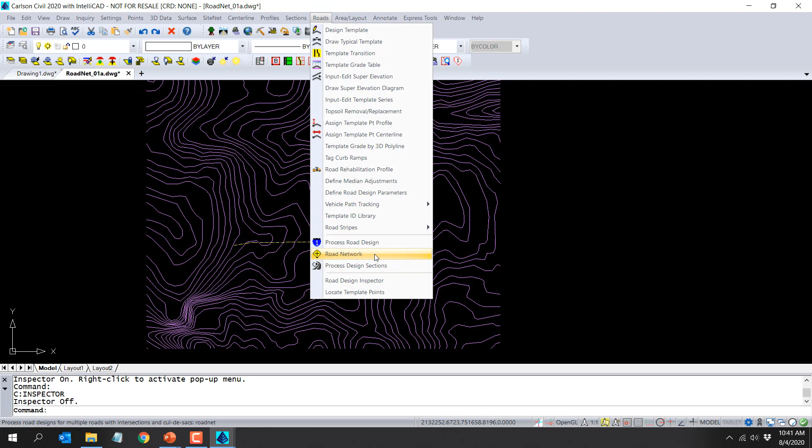So just as a check, these are 0 elevation centerline polylines, and we're going to use that to do our road network. So this is under roads, road network. Road network to process. So it does create that RDN file, and I'll just call it and put today's date.

All right, so we're going to work in this dialog box. The first thing we need to do is go to settings. The existing surface, so I don't need to sample along the center lines or cross sections or anything like that. I just give it my whole existing ground surface.

Process on updated design files, I have set to prompt. That's going to annoy us going forward. But throughout the program and any of, especially these network type deals in Carlson, they're going to give you an option to turn off the automatic updating or turn it on altogether, which is auto, or set to prompt. So if I accidentally change a center line, I may say oops and want to hit an undo. So if it prompts me that something's getting ready to change, I want to know that before it does it.

Output options, triangulate and contour. This is my proposed surface. So I do want it to create a PG, and this will be road. So this is going to be a surface proposed ground just along my roads. I will have it draw contours.

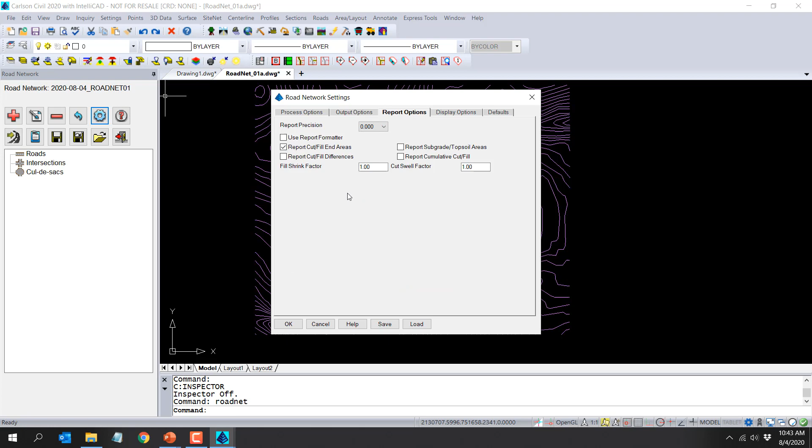And then I think that's all I need here. It's always important that the changes we're going to make are mostly going to be in that RoadNet file. So as you do things over here, make sure to hit the Save button, and that saves the RDN file, because we're going to do a lot here before you ever see anything here.

So I'll start by screen picking a polyline and then assigning a center line to this. So I'll do CL1, so that was my CL. You can see it showing up here. And then the next thing, it prompts me for a new file name for the proposed profile, so you can see it created it.

I haven't designed it yet, so let's look at the editor. This did the same thing that we did in the previous exercise. It started my proposed grade at existing ground at the start and the end, and it's actually tied to it, okay? I can go in and just click here to add a PVI by screen picking on the screen, so I don't need to know elevations. I can just pick what I see and set a vertical curve.

And maybe I'm going to add another one up here. Okay, so it's a roller coaster. This is when it's fun, just kind of demonstrating.

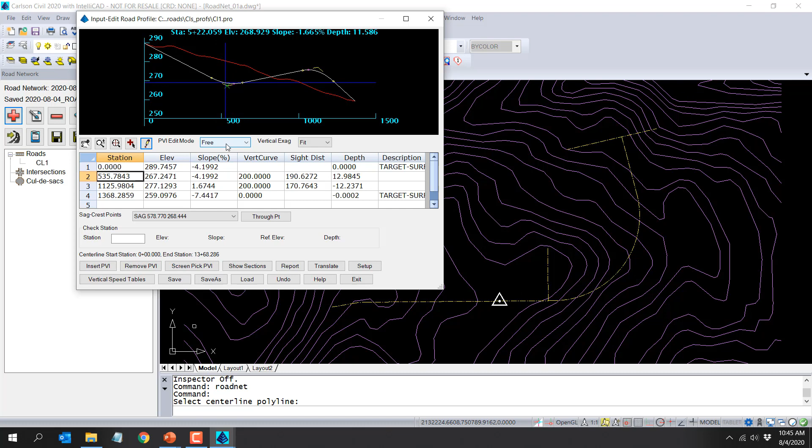I can use this button to edit that PVI. The PVI edit mode can be constrained - you can hold the slopes, you can hold station or elevation. Like in the previous exercise, as I move along the profile in the graphic view up here, I can see station, elevation, slope highlighted and displayed above. But it's also tied to the CL file in the drawing, so I can see where I am in plan view while I'm moving along in profile.

So I am going to click save on this and then back to my road editor. Notice up top there are 3 files that are required. I have to have a horizontal alignment, I have to have the design profile, and I have to have a template. So let's go in and do the template.

So this is going to be my typical section. I'm just going to call it main. And then again here I'm going to edit and create this. So this is where it's prompting me, and I'm not ready for it to prompt me, but it keeps prompting me. So I'm going to design this template from the centerline out.

So I'll start with the grade element that's going to be a minus 2% from the center line to the edge of pavement. It'll be 13.5 feet. And then I'm going to give it a unique identifier, so that template point is called EP for edge of pavement. And that's what it looks like.

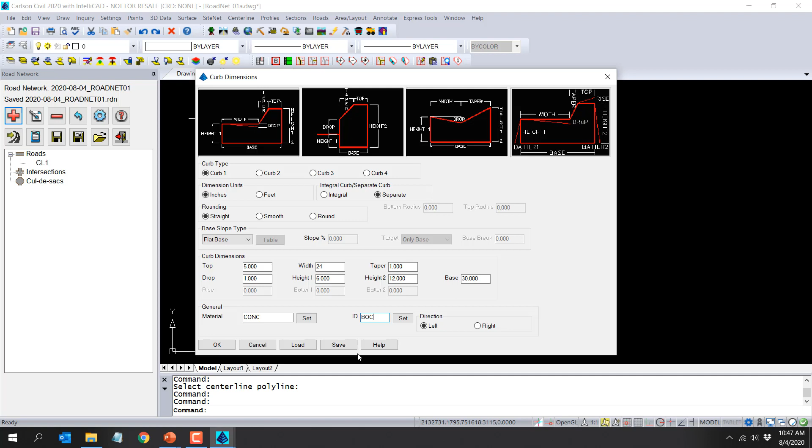Again, this is important to notice that we have save and load buttons in everything, so you can save out your curb styles to be recalled later. You can also save out the whole template here to create your library. So here's my curb. I'm going to add another grade element that's going to be like 4.17 positive for, let's say, 4 feet, with an ID point that I'm just going to call SH for shoulder. So those ID points we want to be unique, simple, and brief.

From there, I'm going to add my cut slopes. I'm going to keep simple slopes here, but you can have them changed based on the depth of cut or fill. You can force a berm, you can put a ditch in.

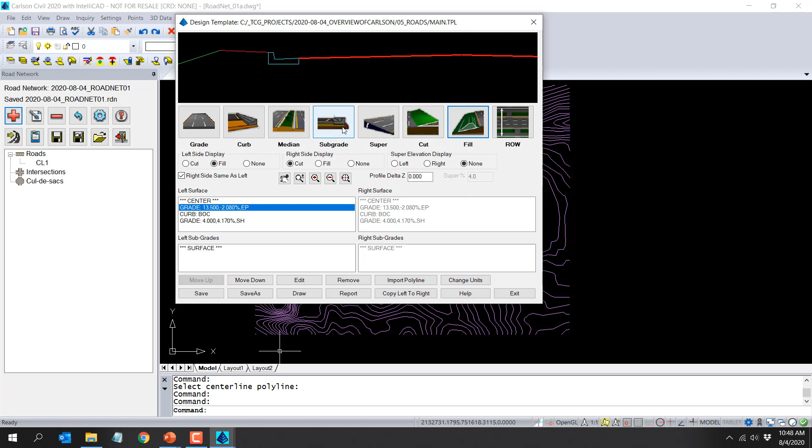On fill, I'm going to keep this simple, but again, notice you can force a ditch, add a berm, all kinds of things - this is just a simple slope extension. Now we need to add some depth to our subgrade. We're going to have 2 inches of asphalt and then 8 inches of stone underneath. So vertical offset is going to be 2 inches. And I'm going to tie this asphalt subgrade to my edge of pavement point.

Rather than put 13.5, which would force the asphalt to stay at 13.5 even if that edge of pavement shifts out for a turn lane, I want to put EP here, and it's just going to tie it all together. Material is going to be asphalt. Then I'm going to add another depth of subgrade. For this vertical offset, if I want 8 inches of stone underneath the 2 inches of asphalt, this is actually how the bottom of that stone is set, so I'm going to put 10 in here. And then the distance, I want it to actually go a foot behind the curb, so this is going to be EP plus 3.5. Again, by tying it to that edge of pavement, if the edge of pavement deviates from being parallel to the center line at any point, my subgrade is going to follow it.

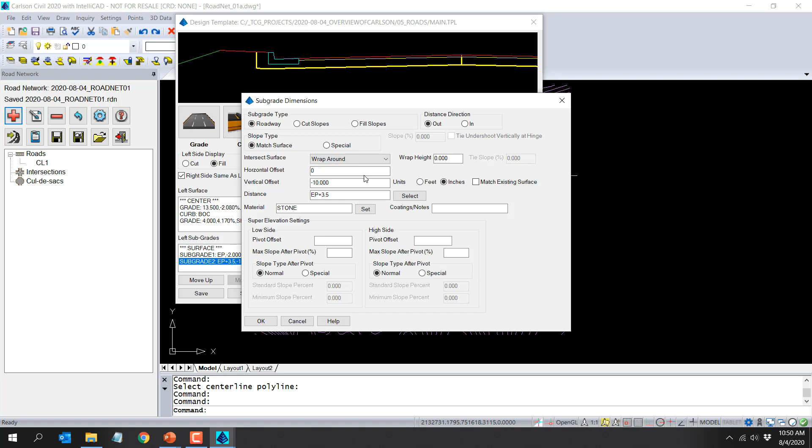This will be stone. So you can see that that subgrade was set to go straight up, and just tie into the top of surface. I've got an option here - if I double click, I can also have it wrap around, maybe for 8 inches, and I can have it look like that. So you can build these templates pretty much however you want. Again, you can save pieces and parts and always recall them.

Now, for Centerline 1, I have those 3 required inputs. Let's go back into my profile viewer. Now that I've got my sections, I can get some more information from this. I'm on a laptop screen, so it's not perfect, but now that I've got sections - pull that over, there we go. You can see I've got cut and fill numbers at the top of my profile. Also, if I can position everything right, I can see a plan view, a profile view, and a section view.

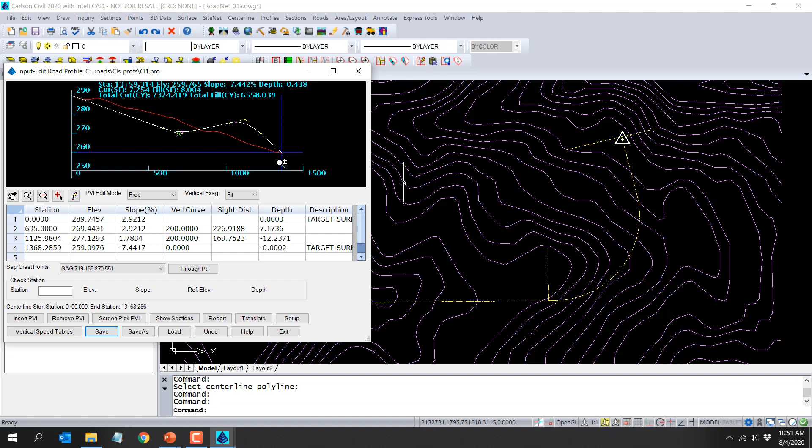And these cut and fill volumes are live. So if I change that, you saw that update, okay? Now, let's also pay attention - right now, the way I've designed Road 1 is that it's going to be a fill section coming in to where it ties into Road 2. That's going to update, and you're going to see what I'm talking about when I say we're working with a network, not just a road design, but a network of roads.

Not going to update yet. Nope, okay. Now, we've only got one road here, we have no intersections. In RoadNet, you don't create any intersections - they are identified from the geometry. So when I screen pick a polyline for Road 2 here, and then I assign a center line, as soon as I give this a name and hit save, you're going to see intersections populate because it now recognizes that.

So I have a CL and I have a profile, you can see here. Now, because Road 1 dead ends into Road 2, Road 2 is my primary road because we want its template to carry all the way through that intersection. So look what happens - our default profile for Road 2 does what it did the first time. It ties into existing ground at the start, it ties into existing ground at the end. And look at what that left us - the profile for Road 2 is significantly in a cut section.

So now that we've added Road 2, we want to go back and look at Road 1, and you'll see that once we added Road 2, the intersection changed and dropped so that it meets the elevation of Road 2 there.

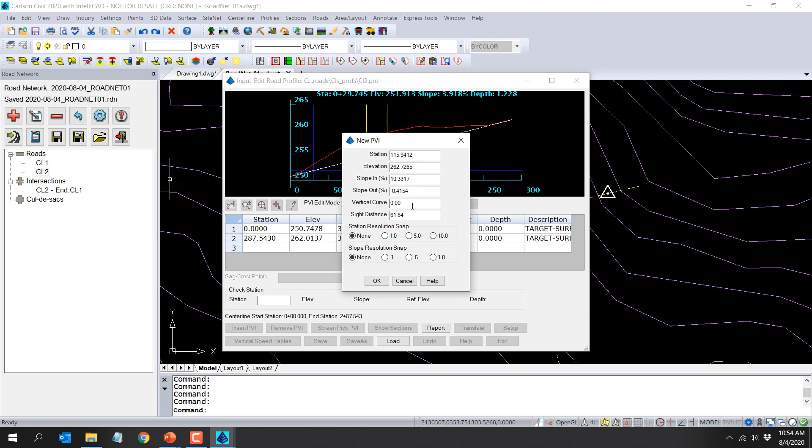Let's go in and edit this profile. Same way we did before, I'm just going to pick a new PVI and give it a very short vertical curve. We're back in fill, and if we understand things correctly, we should see the profile of Road 1 has been adjusted to where it's fill.

So that's how that network works. All right, we're going to add Road 3.

There's not a lot to do because the profile is going to go kind of straight uphill, but it is going to give us another intersection. We can look at that profile. So that's it, so that's our proposed.

We're keeping the same template for everything. So I'm going to hit save on my road network, and then the last thing I want to add are cul-de-sacs at the end of road 2 and the end of road 3.

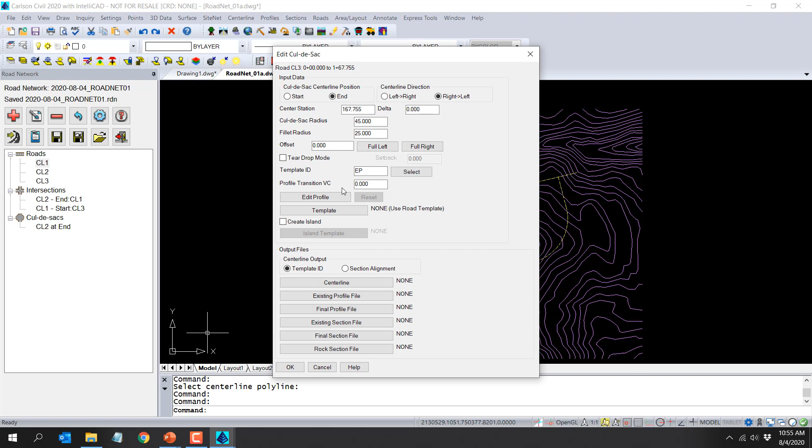Very easy, I can do full left, full right, or I can just enter the bulb and the fillet radius and it'll be straight on. Same thing again. And it remembered everything, pick OK.

All right, so I am good, I'm going to process now. And it's not pretty, so like I said, for demo purposes I usually just kind of design a roller coaster look out of this. But you can see what we've got.

If I look at my report, you can see all of my quantities. If you zoom down, it breaks all the dirt numbers down into end area sections. It breaks every piece of every road down, every intersection, every cul-de-sac, everything.

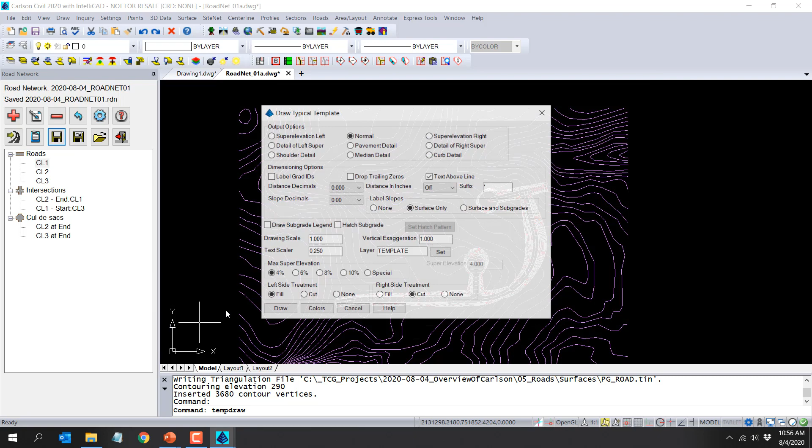Let's see, what else do I want to show? We can always draw our typical sections, which this is just always fun to me because it's always a pain to draw these manually and make sure you get it right. But if you insert this into your detail sheet and it doesn't look right, then your design is probably wrong.

What else do we have? If we go to our 3D viewer, we have 2 surfaces. So here's our PG road, so this is what our road looks like.

We can look at our merged surface, and this is what it looks like. Every time we process, it's going to update. So everything is very dynamic.

So if I go in and decide that I want to make this a little easier to work with, I may want to go in and just delete that PVI. So I can remove a PVI. I may just take this one and drag it back to here. It's not where I meant to drag it, but drag it back. I can save that, I can exit.

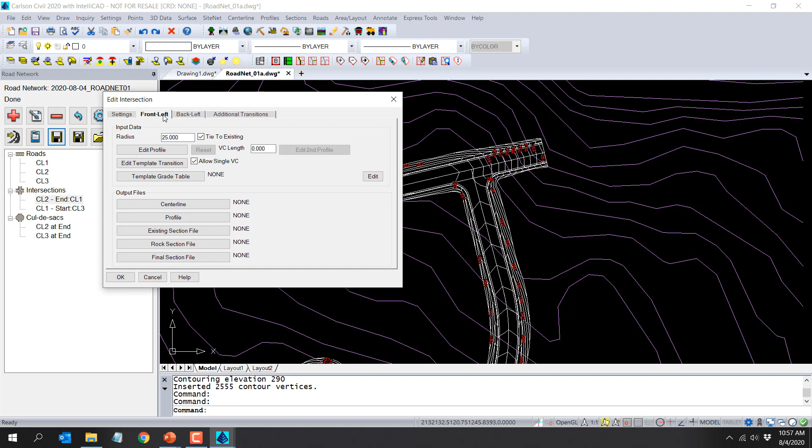Let's just redo everything. Okay, while I'm here, I don't want to forget, because I started this earlier, all your intersections, you do have a profile for each corner of each intersection. So this can be changed, just like every other profile.

But I want to show a couple more editing things that we can do, or design things that we can build in. I'm going to use this, which is an erase by layer, and see if I can get in here. I want to just delete the contours and the labels.

So when we do, I'm going to freeze that too. So when we do this design, it draws the contours, but these are all just break lines. So if I view these in 3D, if you're somebody that's been doing grading for a long time and you're comfortable with it, you can go in and just manually manipulate these and make changes.

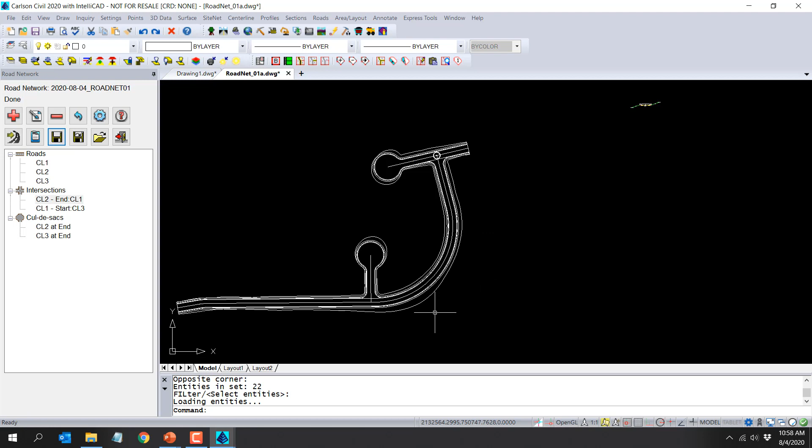So what I want to show you here is, let's just erase these. And that one too. Okay.

So I'm going to turn on 3 other layers, and let me show you what else I have in here. So I have this polyline, which is a widening of the edge of pavement for road 1. So if I want to kick this out, I want to have my edge of pavement follow this alignment, and I want to show you how to do that.

I also have, and what I'm going to do on this will end up adjusting my surface, template, everything, quantities. What I'm going to do here is, this is a 0 elevation building pad, all of these, these are zero elevation lot lines.

So I want to use my RoadNet design to elevate these polylines. It's not going to build it into my surface, but once I elevate them, I can then start working on my surface. So I want to show you how to do all of that. Let's actually do the widening up here first.

This is going to be an edit to Centerline 1. Notice here are our required inputs and here are our optional ones, so we can do any of this that we want. To add this as an edge of pavement, it's going to be a template point centerline.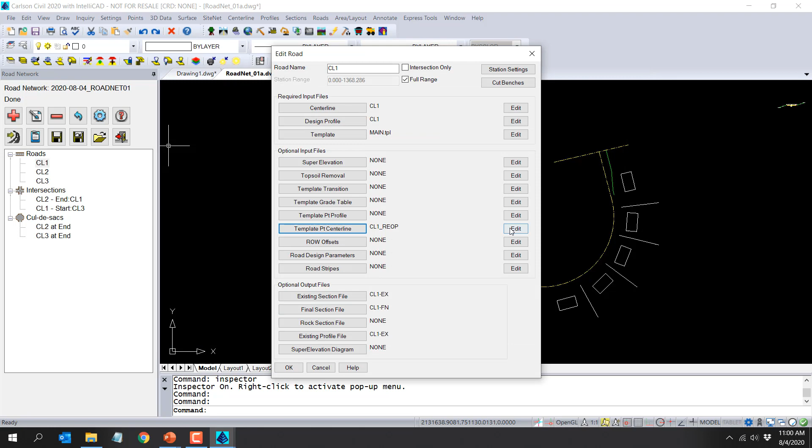If we add, we go up here, template point ID. So we're picking a point on our template, which is edge of pavement in this case, and we want it to follow this. It's going to be a centerline file, but I'm going to do it by screen picking first, and then assigning a centerline.

I always do this, and I'm going to do CL1, REOP, right edge of pavement. It's going to change the alignment on the right, and I'm going to save that, and I'm just going to pick OK.

Let's go ahead and process that, and you can see it's recreated all those new surfaces for us and everything. Surface file viewer, like that, and you can see.

All right, so let me explain. This is where I was going earlier. I did a bad job. Let's see, it's clear. Select layers from screen. Let's just get rid of these contours again.

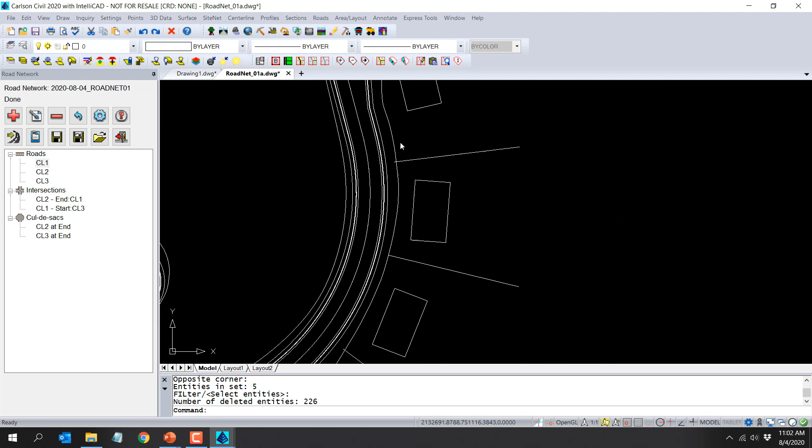Okay, that's close. All right, so what I'm going to do here is I'm going to say I want to elevate my building pad, and I want it to find the highest point or the lowest point on the shoulder polyline and set my building pad maybe 2 feet above it.

And then on my lot lines, I want it to find the elevation at the shoulder, and I want it to go up at a certain slope, and then flat for a certain slope. And then at the back end, I want it to tie to existing ground. So this is not going to be great for grading wise, but that's how it's going to work.

So under output options, I'm going to elevate pads and elevate lots. Elevating pads, I did this earlier. The reference template, it's going to find the SH point on my template, and it's going to find any polylines on this layer within 100 feet of the shoulder. It's going to find the highest elevation, and it's going to set a vertical offset 2 feet above. So that's what all that is.

New polyline on layer 3D building pads, keep the originals. Elevate lots, I don't know if I'm actually going to do this right, but grading rules, I have to set a file. And then edit. So front slope, I want it set, I don't know that that's going to come into play.

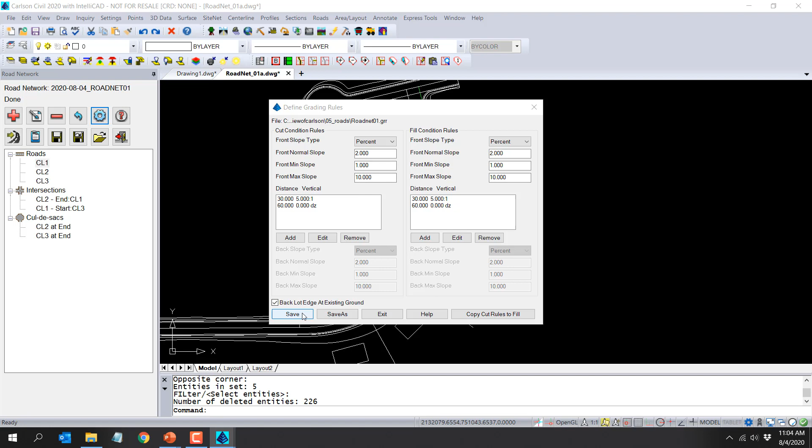Okay, so those are the grading rules. It's going to apply those grading rules from template point ID SH. This is my 2D polyline, this is my 3D polyline layer, the front has to be within 10 feet, so my lot line has to be within 10 feet of the shoulder.

I think that's right. All right, so I'm going to hit save. Let's reprocess and see if we get elevated pads and lot lines. And yeah, the layer color is the same, but we've got everything elevated.

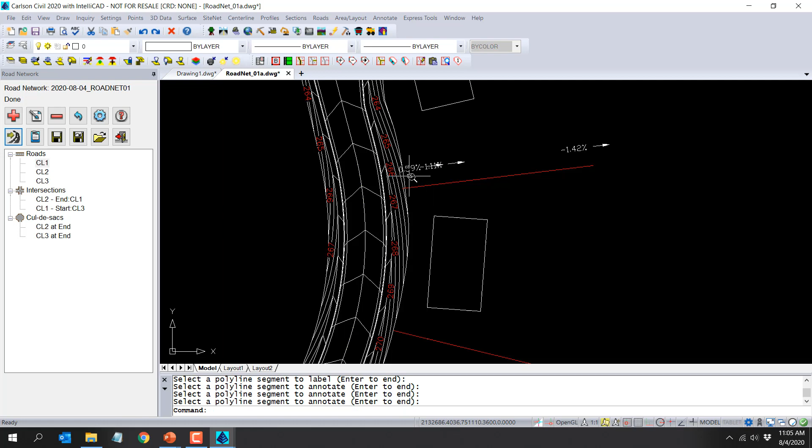Here's this. Let's go in, annotate, label polyline segment, slope, selection, that's fine.

Anyway, let's look at it in 3D. Oh, I know why, okay, well that's why. There was still a big slope there. Yeah, well, you get the idea.

Okay, so I think that was all I had on RoadNet. And last, crossing my fingers, hope I get through this. I actually had some pretty bad technology luck the last couple days. I probably shouldn't jinx it, but I am going to open my folder with hydrology and my little drawing here. Okay, so let's set this.

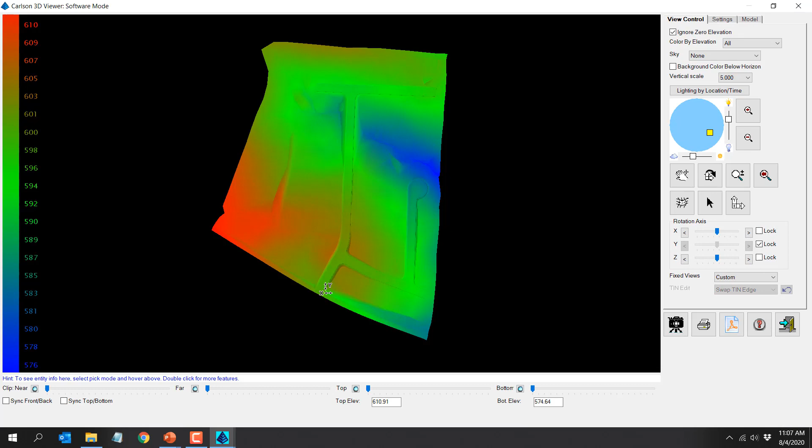Okay, let's see what we've got to start with. I have a surface composite which I want to use for my drainage. I've got my roads designed, and my existing ground surface in there. Everything's merged together. I do have a centerline file for this road, so if I hit edit I can see that centerline. I can see my preview, which makes it nice.

I've just kind of pre-spotted places where I could put inlets, and I think I'm going to skip this one. I'm going to add another one down here.

I'm going to switch to Carlson's Hydrology menu and go to Network and my sewer network settings. Network type is going to be storm sewer, so it'll give me the ability to see inlets. For the network file, I'm going to set up a sewer network file.

For the surface file, I want it to reference that surface. Link sewer network to reference surface and center lines - I've got that off because in this case I don't have a full road network or anything behind it.

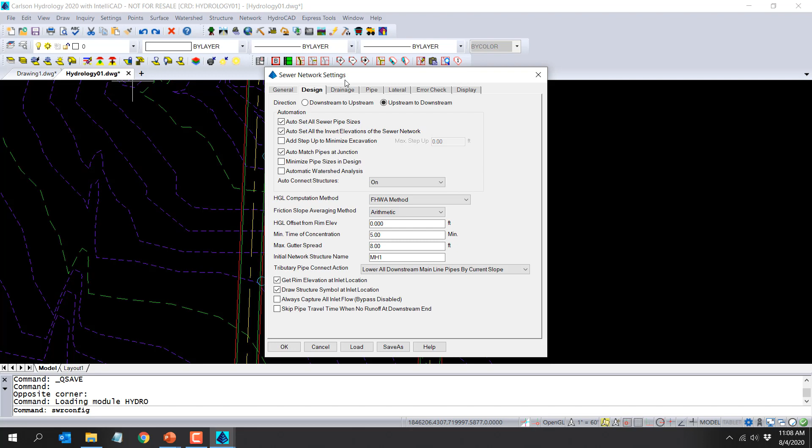For design, I am going to design upstream to downstream, so I'm going to start up here and go down. This will be my outlet.

Let's see, auto set all my pipe sizes - I can go back and change it if needed. Auto match pipes at junction. Auto connect structures, that's fine for what I'm doing. It's very simple here.

So what I am doing, I'm not going to be designing at all. I'm going to show you more drafting, so I am going to skip completely out on the design side. I will refer you to Mark Long, or contact me to get in touch with him for that. He's so good, so I just kind of gave up trying to keep up.

I do have to set a rainfall library, so I will set that. My pipe design criteria - I can set minimum, maximum cover. I can set velocity. I've got a drop across junctions, usually 1. Pipe at junction, I'm going to match my crowns, so on and so forth. And I think that's about it. Showing my slopes as percent, and I think I'm good.

I don't know why it always says that. Okay. All right.

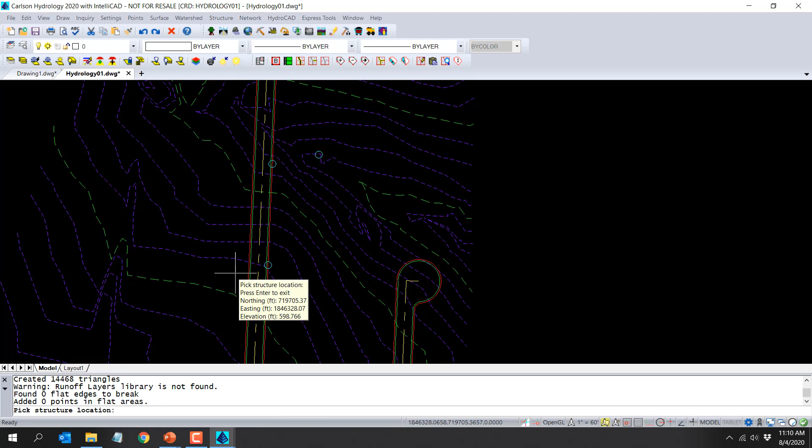I am going to create a sewer structure by screen picking, and this is reading my surface elevation. So my first one, I'm actually going to just pop in over here, and you can see that this shows up. Most of my work is going to be done in this dialog that is saving everything out to that SEW file. Structure name is manhole 1.

I do have an inlet here with a box underneath, so I've got some things that are pre-made, right? Combo grate - so it is a grate and an inlet. Box underneath - I am going to make sure my symbol... I can't see my symbol very well from there.

But the reason I have a center line is to get that symbol to rotate according to the alignment, okay? So the reference center line I will specify with my CL file that I had created ahead of time. And so I can see that inlet in there. But down here I can tell it to rotate that symbol parallel to the center line. It just takes some practice and doing this a few times, knowing whether it's parallel to center line up or downstream. So it's read the rim elevation.

By default, it's set the depth at 4, which is fine for this. So I am going to hit the save button, and then I will go... no, not there. I'm going to go here and add my next structure by picking a point, and I'll just try to aim here in the middle.

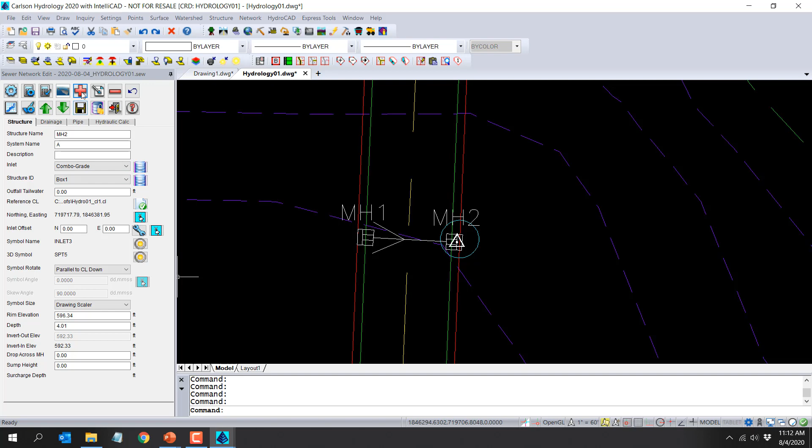I'm going to pick this button to pick my third point, and I'm going to go here - so that's my third inlet. And then I'll just keep on and pick a point here. Now this is my outlet, so there is no inlet, and I'm going to change that structure to a wall so you can see that. And so I've got my sewer network in.

I'm just going to hit save, and let's look and see what we can do with this now. So with this button, I can do a quick view of the profile. A lot of us have, for years, designed in a spreadsheet type format, so if you want to make any changes, you can do so from here.

If we can use these buttons to navigate upstream or downstream. So if I go upstream, I am now highlighting manhole 1. If I switch to the drainage tab over here...

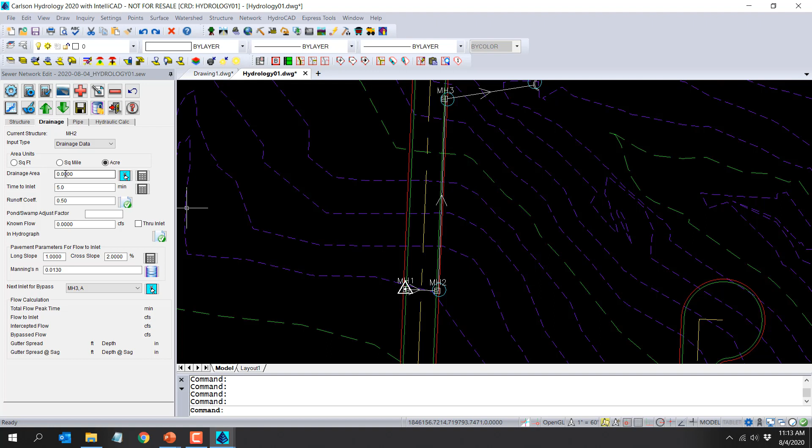It keeps switching off. Save, switch to the drainage tab. When there's an inlet, you can hit this button and it'll calculate and show you what the drainage area is. I can switch downstream and run that calculation as well.

So all of this is going to be based on how good that surface is, so you can't stress that enough. You've got a pipe tab, so if you need to adjust the pipe, you can see everything here set to 12 inch. You can change that, and you do have all your hydraulic calculations you can see.

I'm going to get out of this dialog box here, and let's look under network, and I just want to show you how we can view some of this. So draw sewer network, if I want to see it in a data table, I can do so. There's two different tables: sewer structures and catch basins, or pipes. You can do upstream to downstream, and you can completely configure your table as needed.

Oh, hang on. I canceled out of that. Let me try one more time. Link data tables to sewer network. Oh, it was set to prompt. That's what I wanted.

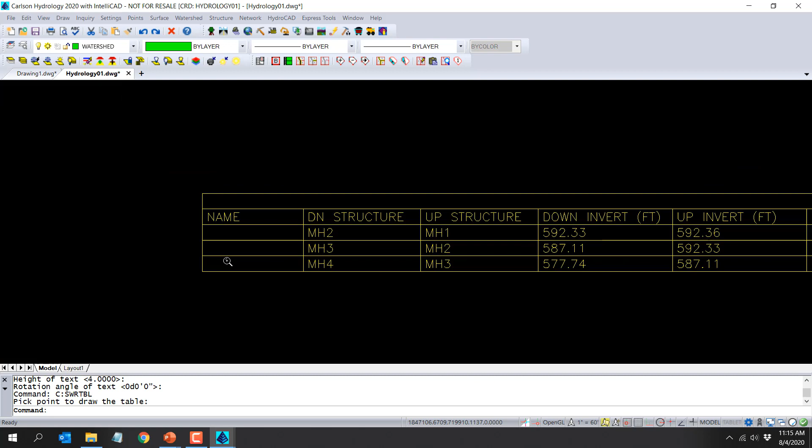Oh, I got something in there. All right, got some formatting problems, but I'm just going to hit enter and go right back to that. And I can do the pipes. So that's one way to view it.

We can also view 3D faces. So that is the magenta, these are the magenta faces here. What you can do with those is you can look at those in the 3D viewer and see what that looks like. And this is pretty realistic looking.

And then last, I just want to show you how to draw a profile. So when we draw a profile, we have to extract that profile, that PRO, out of this SEW file that we're working in. So you can set your upstream, you can set your downstream, and then you can choose whether you're going to draw this profile or create it upstream or downstream. When you output the profile, you can just draw it, or you can save a PRO. So when we save a PRO, we can go back and manually edit like we've done before.

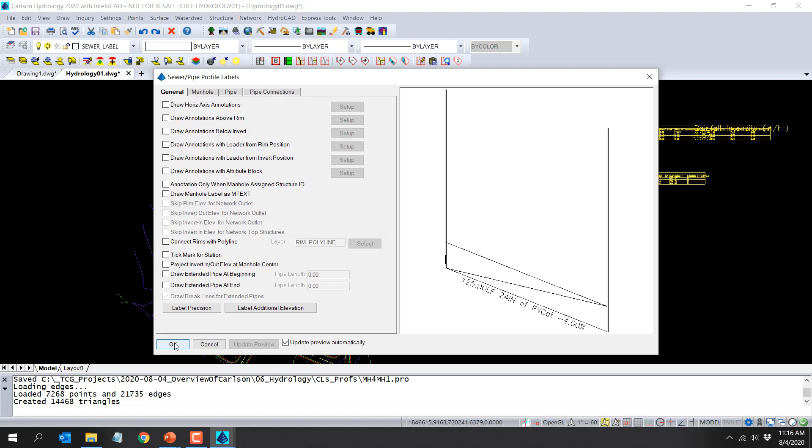In this case, I'm going to have it draw a design surface for me. This is the surface that I'm going to use. And then it's asking me to save this profile run. And this all looks familiar to you. If we do sewer pipes, that's what it looks like. And back here.

So again, there's a lot of formatting, but I want to show this. We do have a pipe coming out of the ground, so I do want you to see how this linking can work. In this case, I'm using a beta version. Oh, it worked. Good, I shouldn't have mentioned anything.

That didn't work before, but when you double click on one of these labels, it should open up the way you just saw. But let's say I want to change my location. I don't want it to come out of the ground like it is, I want to pull it back and have that be the new location. I'll just save this and exit and then watch. It's asking if I want to update. Now that 3D view is not going to update.

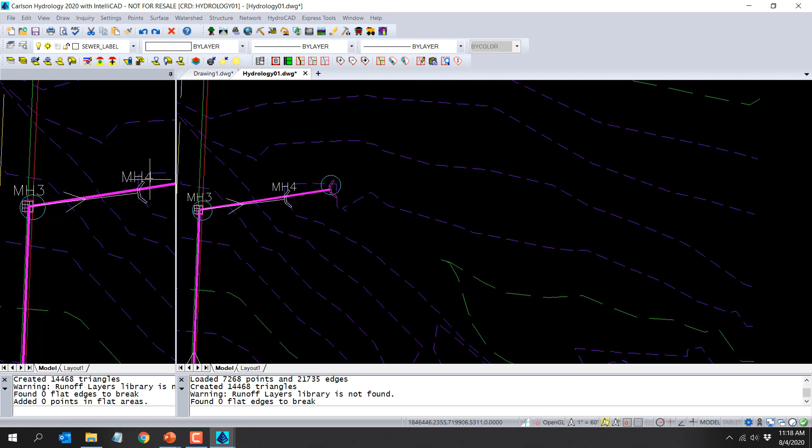And you can see that's updated. Yeah, it needs to be at 0, doesn't it? Well, let's just edit it. We're almost done. So that is, it's an outlet, so we don't need a 4-foot depth. That's what we need.

Try one more time. There we go, back out of the ground, but that's okay. All right, I think I actually made it.